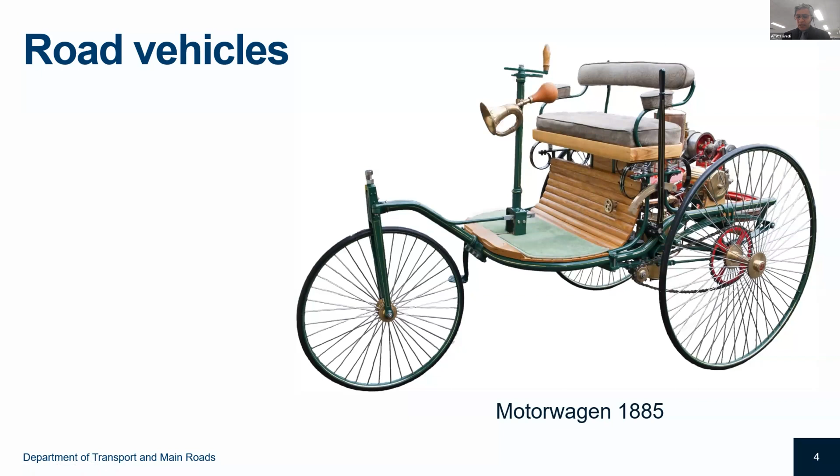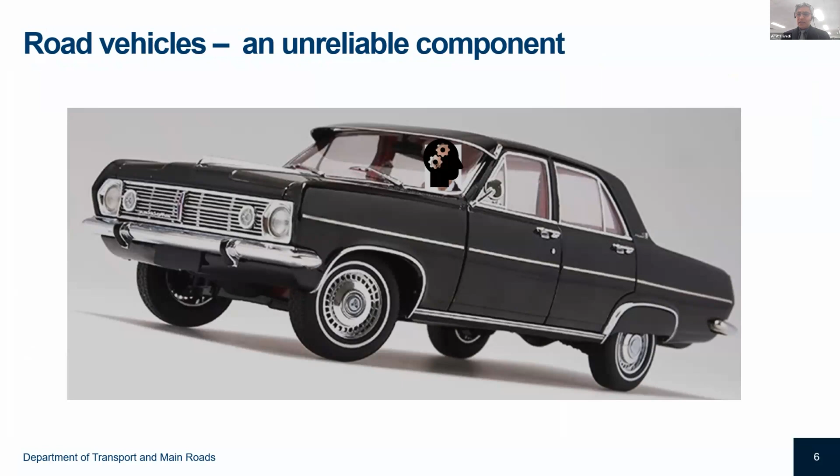So there you go. Let's go back to history. Automobiles came into the world in 1885. Carl Benz introduced this three-wheeled vehicle, the first patented production vehicle. Others did as well, but they never went to production. And ever since then, we have had pretty good evolution of the technology, and Carl Benz's company today is Mercedes-Benz. So there is a massive development over about 135 odd years. Yes, there has been quite a lot of development, but there has been one unreliable component present right from the beginning of the 1885 motor wagon, and that is the human driver. So all our projects are about trying to support the human driver or potentially replace it if we can.

Now, while automobiles have evolved significantly, computer technology has evolved many fold, massively. What you see on the left is an 1885 calculator, the Thomas arithmometer, a mechanical calculator, and on the right is NVIDIA's Orin chip, which packs in, I think, 17 billion transistors and 200 TOPS of performance. And I think they've got a new one now, which is about 4 times more powerful than this one.

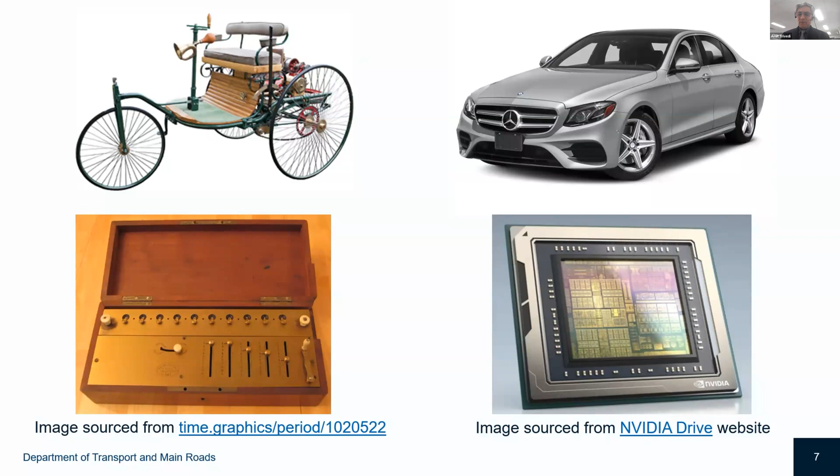And I'm going to focus on the physical road infrastructure side of the work package, and Professor Glaser will focus on the remaining work packages. So I'm going to straight away show a quick video. This video doesn't have any sound with it, but this is Zoe 1 when we put it together, and these are the QUT engineers putting Zoe 1 together.

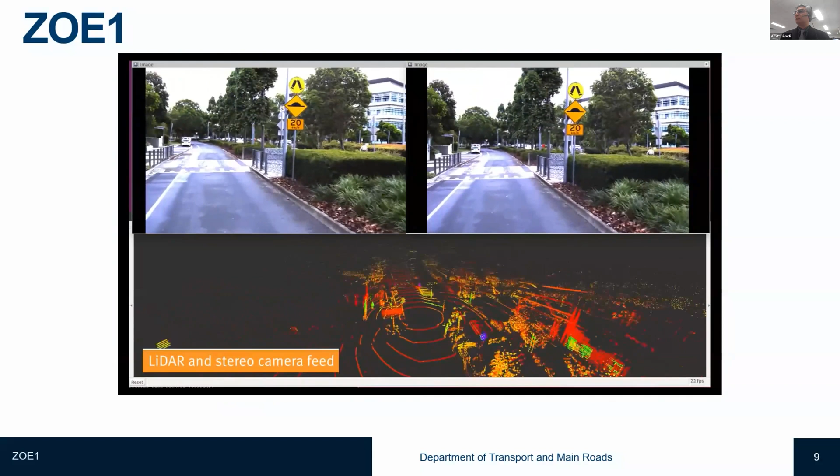Our final report is a public report. It is available on the iMOVE website. What we did with this vehicle, we went out on a 1,200 kilometer drive around Southeast Queensland, various roads, various weather conditions, day and night, and collected data, worked out the traffic lights, traffic signs, and road lines, as well as accurate positioning and what are the impacts or what is actually required.

What came out of that, our results, the report provided quite an interesting insight. This report was actually published in 2019, so it might not be that interesting today because we know things have evolved quite well, but at that time it was quite interesting to know, and that is that the technology is evolving.

There are 2 philosophies emerging. One philosophy is that if humans can drive with stereo vision and without any high definition maps in our brains, then automated vehicles should do the same. The other philosophy is if you want high reliability, you will need multiple sensors such as LiDARs, radars, and cameras, as well as some sort of high definition map or prior maps to achieve a high level of reliability.

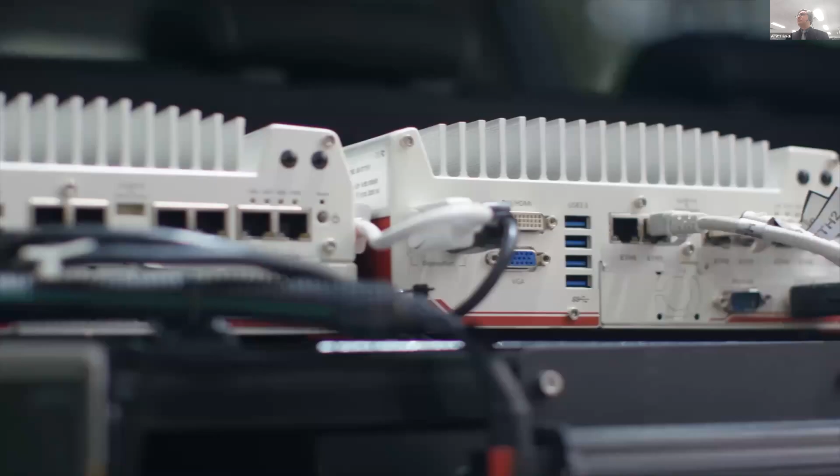As our population grows and roads get busier, the Queensland government is committed to supporting transport solutions of the future. That's why we've teamed up with partners like QUT to prepare for our evolution into driverless technology. A purpose-built research vehicle that integrates automated and connected technology into a Renault Zoe electric car.

There's a lot of talk these days about driverless vehicles, but the truth is there are no commercially available fully automated cars on the roads today. Some cars have limited automated features like adaptive cruise control. However, no fully automated vehicles have been deemed safe enough to handle Australian conditions. And that's why we're running trials just like this, to ensure every step has been taken for maximum safety in the future. There are several different levels to automation in vehicles.

Levels 0 to 1 are older cars that are both hands-on and eyes-on with little to no automation. Drivers need to complete all tasks manually or do a majority of the work. Level 2 is the current level of automation in cars available on the market today. Think Tesla and vehicles with driver assist technology. They are eyes-on and can be temporarily hands-off. They have partial automation, where the vehicle assists the driver with steering, acceleration, or parking. But the driver is still responsible for safety-critical functions and must be ready to take control.

At level 3, the biggest leap in automation happens. Here, cars are still eyes-on and temporarily hands-off, but have conditional automation, such as traffic jam assist. This means the vehicle monitors its environment to drive itself in certain conditions. The driver's attention is still required. However, the system will provide a few seconds of warning before handing control back to the driver.

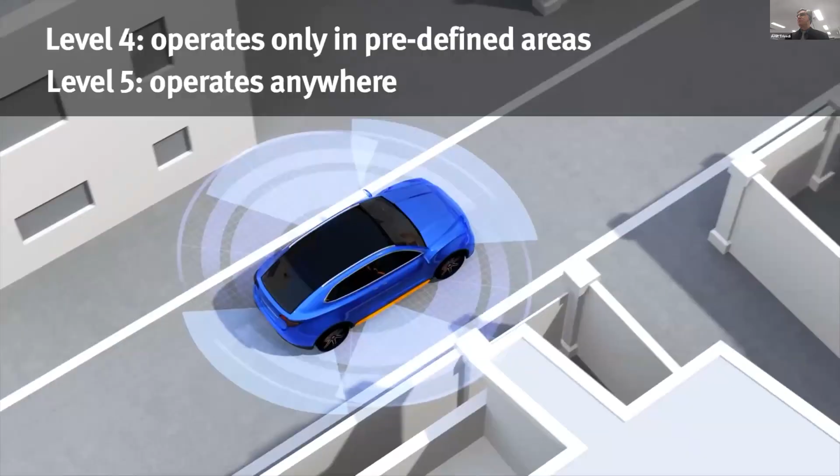Levels 4 to 5 are the highest levels of automation in vehicles. These vehicles are eyes off and hands off. So the driver doesn't need to take control of the car unless they want to. Or at level 5, the vehicle can operate in any environment, in any condition, without any human input at all. This level is still a fair way off.

Zoe 2 is a level 4 automated vehicle. This means it is capable of self-driving in defined areas, with the driver or passenger being able to take manual control when they want to. Zoe 2 combines automated technology with connected technology, so it drives itself, but can also interact with other connected vehicles and infrastructure on the road, so it can take corrective action based on the messages it receives about its environment.

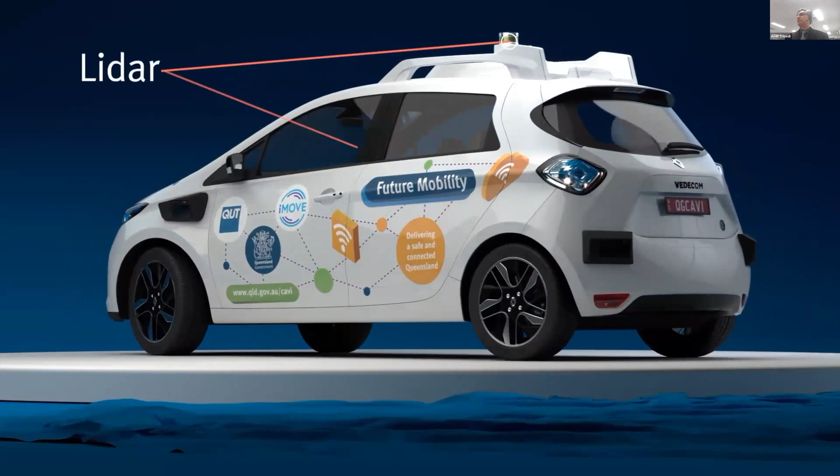Zoe 2 is packed with a variety of sensors, such as LiDARs, radars, cameras, and several computers. These systems work in real time to perform 3 core functions. Some of these systems help with localization, informing the car of its location within the overall environment. For pinpoint localization on the road, Zoe has 3 distinct and independent systems. First being GPS-based, which is satellite-based, and it provides Zoe with an accuracy of within 2 to 5 centimeters.

Second being SLAM, simultaneous localization and mapping. The car has a LiDAR on top and it maps the environment, and when it navigates through that environment, it triangulates and very accurately locates itself. And the third one is a stereo camera in front of the car. When the car is traveling through tunnels where you don't have satellites, nor do you have distinct available points around the tunnel, in that case, we can command the stereo camera to maintain itself within the road lane.

Closely linked are systems that help with perception. This helps give the car a better understanding of its immediate surroundings. Zoe, once it knows where it is in the environment, now it needs to know what is happening in that environment. To understand that, Zoe has a fairly sophisticated perception system. Again, it has 3 totally independent perception systems. First being based on the LiDAR, which is laser-based. Then second one is a vision-based camera. And the third one is a radar, radio-based sensors.

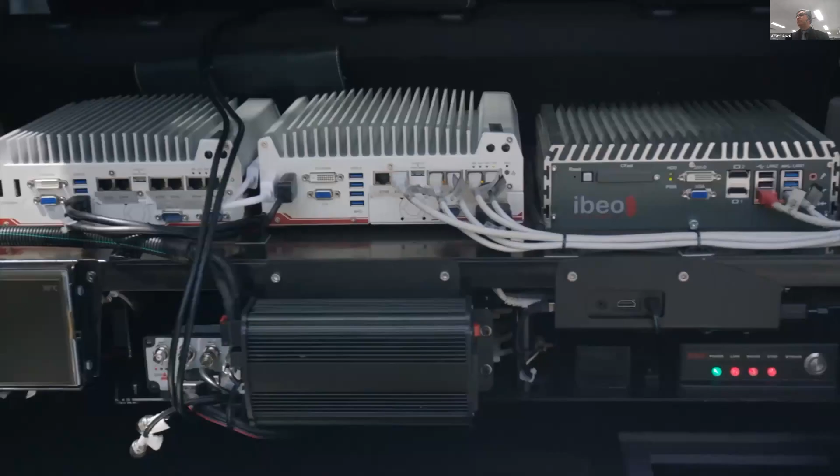Now it looks into its hard drive where a high-definition map of the environment is stored. The high-definition map has all the information about the road's speed as well as any other intersection that it is approaching. Based upon all that information, the software algorithm will start calculating what is the projected trajectory of the car and various objects around about it. Based on that calculation, the car now decides how much steering angle it needs to give, or acceleration, or the brake,

and proceeds further. While these technologies work very well, they are not perfect, and therefore you'll notice two rather large buttons in the center console. These are just some of the safety measures built into the vehicle, allowing the driver to interrupt its automation and take full control. The car right from the beginning was designed as a research platform. And as it's a research platform, the car has several built-in safety measures.

First one being the driver can decide any time and apply gentle pressure to the steering or the brake pedal or the accelerator pedal, and the car will hand back control immediately. The driver can also choose to press the red button. That would apply an emergency brake and stop the automation. There is also a yellow button. If that button is pressed, the car will apply a gentle emergency brake and will hand back control. Moreover, there is a remote control. Through this remote control, the car can be stopped remotely.

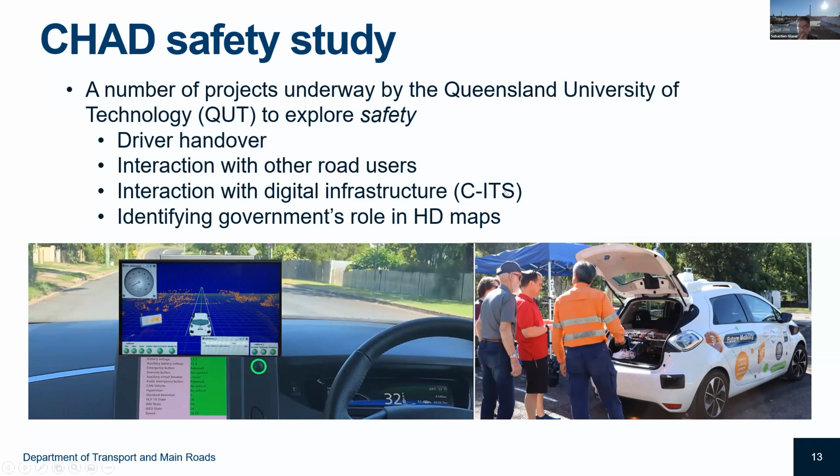I was mentioning it's a world first because it was a very long experiment that was not conducted on a driving simulator. It was conducted on a car, on a test track, and the driver had to react to several different situations during a more than 30 minutes drive. It was tested under several conditions, and for those who don't know what Brisbane looks like in March, we experienced several severe rains, some where we even had to stop, but we thankfully managed to do all the experiment.

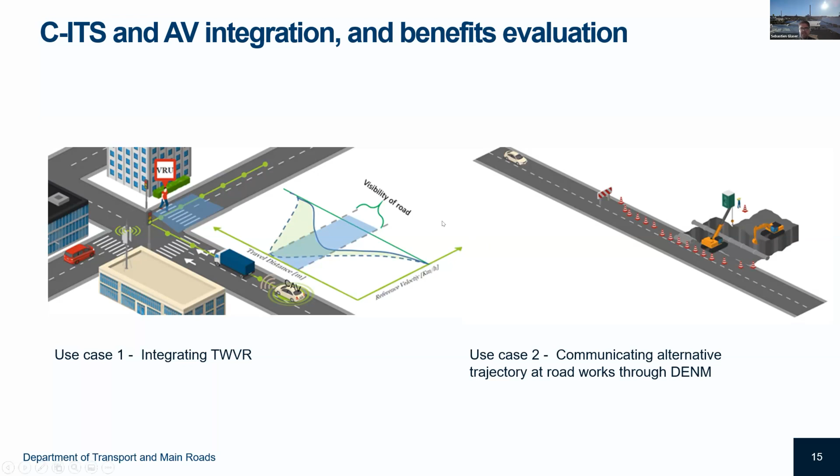The last case I wanted to develop about this cooperative and highly automated driving safety study is the interaction with other road users. It was a quite large sub-project to the CHAD project, which investigates the specificities of the Australian environment that are not taken into account when looking at overseas development of automated vehicles.

Just to cite a simple example, we have specific wildlife that need to be understood. As explained earlier in the video, it's not only required to detect an obstacle, but it's far more clever to understand what this obstacle is in order to predict its future path. If you know something has very specific movement in the environment, it's easier for path planning to define future trajectories which are safe and won't interact with the detected object.

From international review, we selected 13 specific scenarios in Australia. One of them is related to wildlife. We have staggered lines, and plenty of this type of scenario seen in Australia. In order to make sure our scenarios are very specific, and to have a better understanding of which scenarios are critical in terms of road safety, and critical in terms of impact on the deployment of automated vehicles...

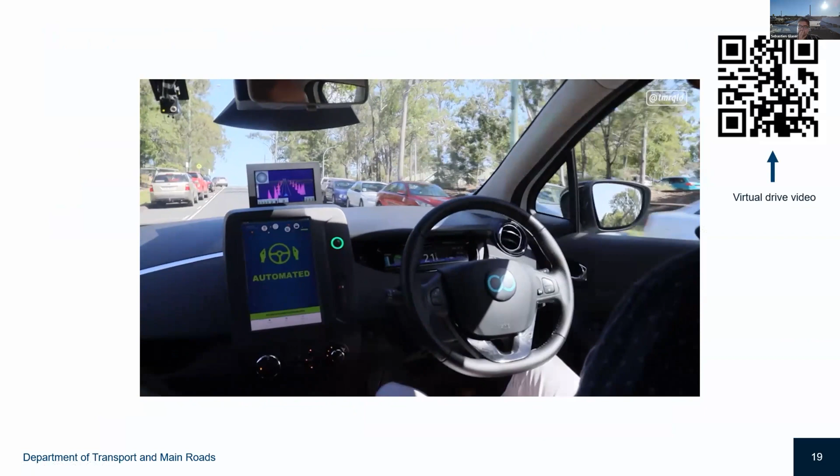In March 2020, the Queensland Department of Transport and Main Roads ran public demonstrations of a highly automated vehicle in Ipswich. These demonstrations were designed to test the public's attitudes and trust of emerging vehicle technologies. The demonstration showcased how automated vehicles navigated real-time traffic and other applications like summoning a robotaxi through a phone app. Overall, 73 public participants experienced automated vehicle technology firsthand.

So yes, Amit, do you want to read this one with me or go through this one with me?

Yes, so CHAD is quite a different pilot than many others. The main reason is that the platforms and database we have in the backend allow us full access to every bit of data that Zoe collects, as well as all the algorithms besides just one safety critical algorithm. Everything else we have access to and develop ourselves, including associated artificial intelligence. So that gives us a lot of control and good understanding by opening the black box of automated driving systems, ADS - what it's like and how they can be difficult sometimes, and how they can be very computer-like, not human-like at times. So that gives us a lot of insight.

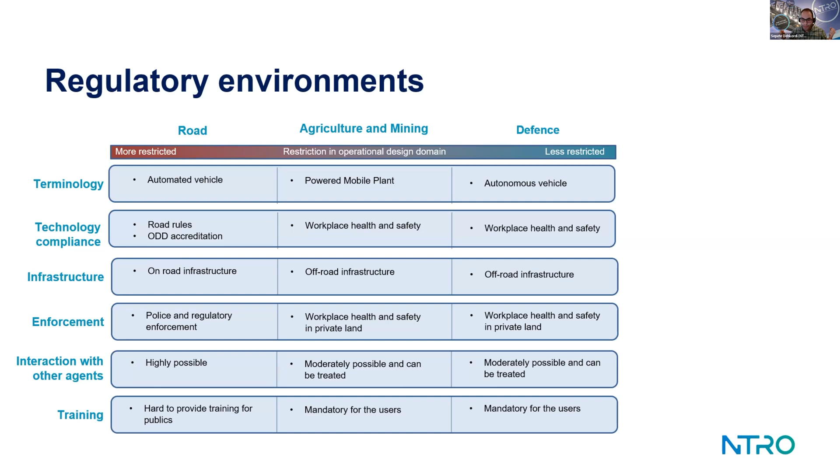So we have different terminologies, we have different objects, but at the end they are actually the same. The question is how we can transition from one domain to another when the terminologies are different but the application is the same. This is actually the subject of harmonized SMP. The harmonized SMP facilitates a smooth transition from one domain to another.

In this first section of the presentation, I want to talk about why we think harmonization is needed. Is it really important to have a harmonized SMP plan? We try to argue the benefit of harmonization. From our experience, the SMP content is mostly the same. Also, many stakeholders are involved in one way or another in developing the safety management plan. So this makes a strong case for the harmonization of the SMP.

The ADS trial has different requirements to operate in different domains, so they have differences with each other. The transition from one domain to another requires defining an inter-domain transition model, and this is usually the subject of argument or confusion in defining the safety management plan. Our practice shows that a cohesive safety standard promotes a proactive safety culture and improves overall safety performance.

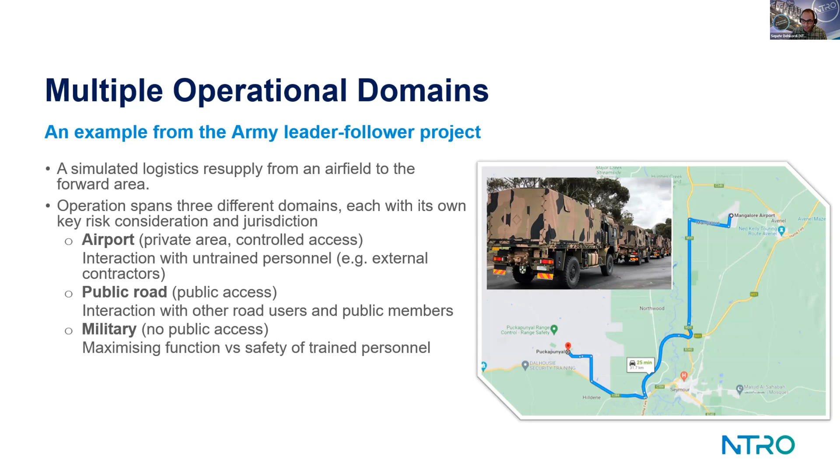Within the military bases, there are lots of things that it's possible to control, and there is a trade-off between maximizing function and also safety of the trained personnel in the army base. One consideration we found interesting was that there was a requirement for the public road to have escort vehicles, and these escort vehicles were not allowed in the forward area in the base station. How we do the transition smoothly between these domains was a subject of understanding the safety management plan completely in 2 different domains.

Also, a safety driver is mandatory on the public road, but it wasn't mandatory, and it was possible to remove the safety driver, in the base station. But again, it comes to the safety and risk register, in which location and where this can be done.

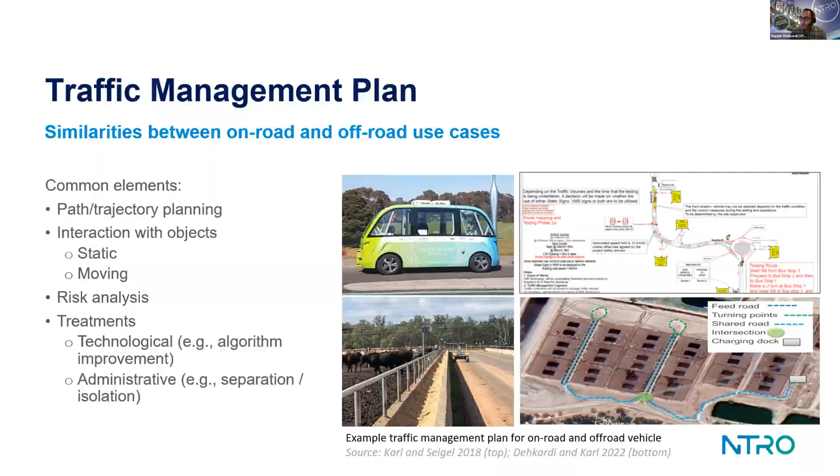To sum up, if you want to just quickly see what is our perspective for the harmonized safety management plan, we work in all areas and we notice some parts are similar. There are benefits of harmonization for safety management. Harmonization of SMP for industry means they can operate on different operational domains. It would be beneficial for regulations, and different jurisdictions would have different regulatory domains, so they can understand each other easily. And finally, a harmonized safety management plan will simplify the regulatory requirements for the project.

Ultimately, if I want to put in one sentence what we think about harmonized SMP, it would result in more fit for purpose operation for different domains. So it reduces the cost and energy that you need to put into an ADS trial.

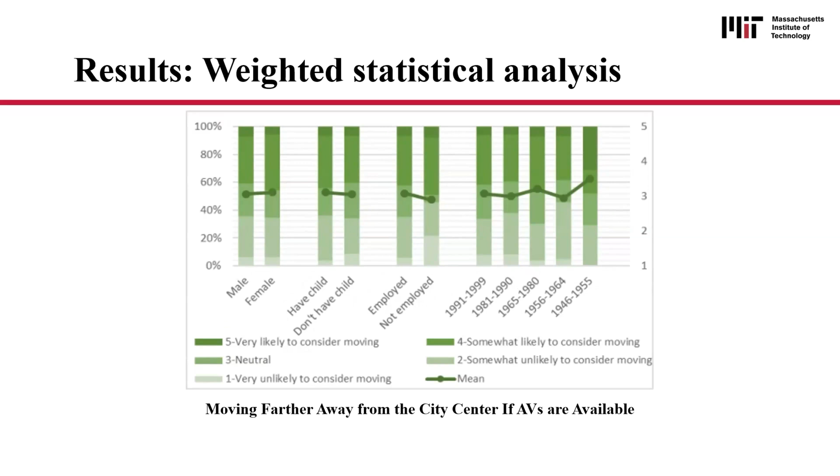This study conducts statistical analysis, including 4 ordered logistic regression models, t-test, and ANOVA. We observed some similar and different model results in this study compared with the previous studies. We have summarized the comparison results of the influencing factors on the above 4 dependent variables. Different groups had varying preferences on AVs.

Drivers with a higher educational level have more knowledge of AVs and show more likelihood of trying out AVs. However, they show less likelihood of changing to AVs and moving further away. They would consider more factors and be more cautious when associating AVs with daily lifestyle.

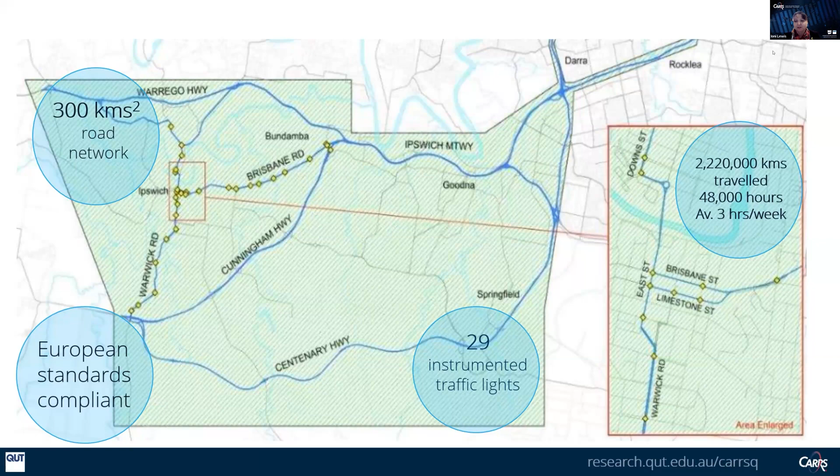In terms of the use cases, there were 4 cellular use cases that we were testing as part of it. That include roadworks warning, in-vehicle speed, back of queue and road hazard warning, as well as 2 traffic light signals, that being the turning warning with vulnerable road user and advanced red light warning.

In terms of the sample, you can see here that the overall sample, we started with 355 participants, 350 who completed our baseline questionnaire survey just prior to the CITS equipment being retrofitted into their vehicles. So I should add, these were public participants we recruited who were willing and able to have this technology, the connected vehicle technology, fitted into their vehicles for a period of 9 months of the trial.

I won't go into all the details on this slide, except to say, as you can see down the bottom of the slide, by the end of the trial, at the 8th month period, where we administered the 4th and final questionnaire, we had 326 participants, of whom 323 completed. So really good continuation of participants throughout the pilot.

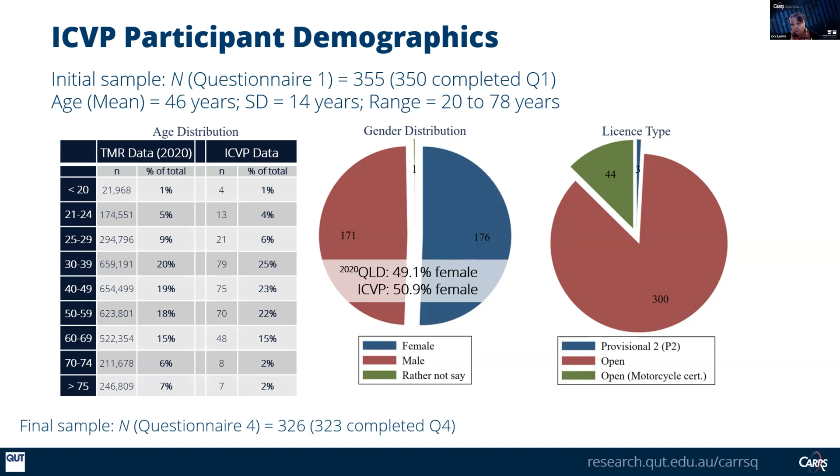Our sample also matched really quite well with TMR, Transport and Main Roads licensing data. So we were quite confident we had a good representation of the drivers who were involved, noting that we were recruiting provisional P2 drivers as well as open license holders.

Just as a very quick snapshot of the participant conditions and hours, you can see on the graph there that essentially, as was one of the participation criteria, participants were required to drive a minimum of 3 hours per week in the Ipswich area where the technology was being trialled. And generally, despite this occurring during COVID, we did have participants easily meeting that requirement.

We also had conditions of an intervention group and a control group. The intervention group was either assigned the treatment first, in which they had 6 months of their 9 months with the HMI switched on, and 3 months with the HMI switched off, and then the baseline first, the other way around, the HMI off for 3 months and then the HMI on for 6 months, and the control group that did not have the HMI throughout the pilot.

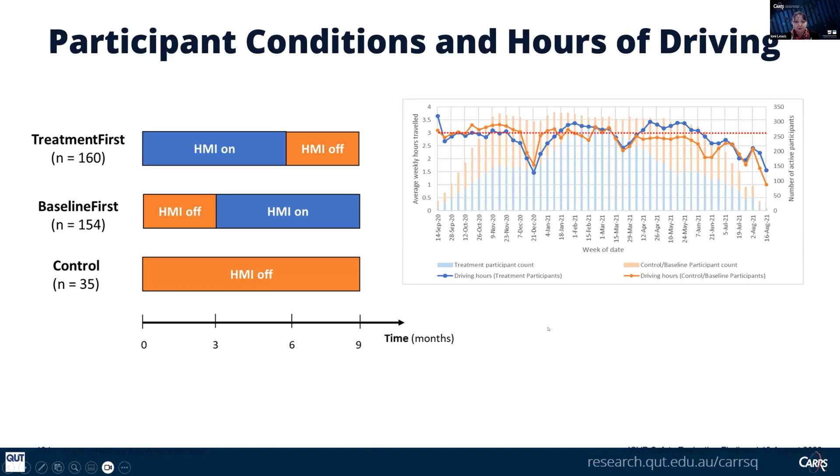At this point, I will pass to Mohammad to talk through the safety evaluations and the driving data that was collected and analysed by himself and many members of the team. Thanks, Mohammad. Thank you, Professor Ioni.

During the coming few minutes, I'll take you through how we answered the first question: does the CITS improve road safety? As you know, it was anticipated that the CITS warnings generated by the system would yield a positive influence on driver behavior, which may lead to a decrease in both frequency and severity of collisions. To assess this, we came up with two hypotheses.

The first hypothesis we call the speed hypothesis, and the second hypothesis is acceleration. And if you are not familiar, the acceleration is simply the summation of the absolute value of acceleration. So we consider acceleration and deceleration without any sign. The first hypothesis assumes the average speed normalized by the speed limit on the approach to or within the use case event is lower when the HMI is on. This is the first hypothesis.

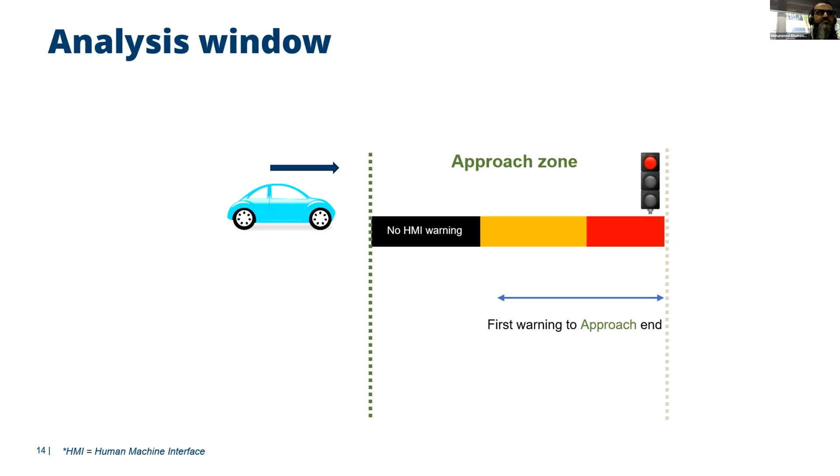We followed this approach to define the analysis window because the whole design of ICVP follows the FESTA handbook. In FESTA, all the analysis is something called event-based analysis, so we have to define a window which includes the event.

We collected a huge number of scenarios. However, we didn't include all of them in our analysis. We did many steps of filtering.

The first step of filtering: we remove all scenarios which don't include anyone, and then we remove all scenarios which have a participant marked as unknown. We also remove the first 2 weeks, the familiarization period at the very beginning, and we remove the 2 weeks when the participant switches from enabled HMI to disabled, or HMI off, to avoid any residual behavior.

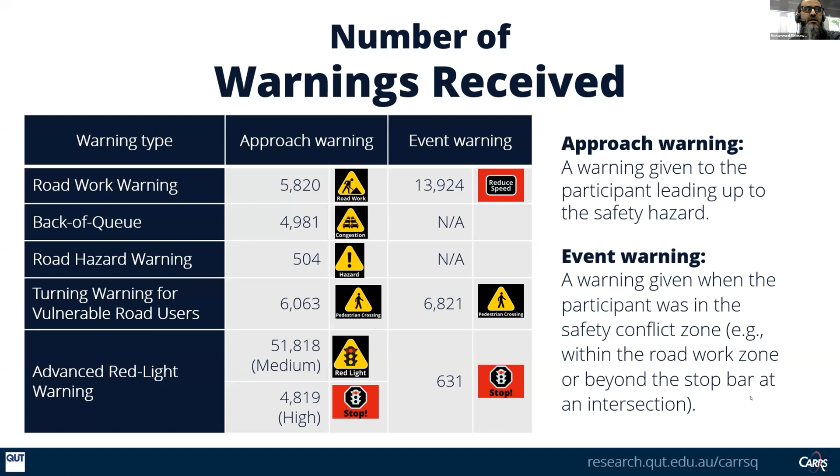HMI disabled. Next, our modeling methodology is simple. We use generalized linear mixed effect models, but because of the strong assumptions of this kind of model, most of our analysis doesn't satisfy those assumptions. So we had to use bootstrapping, a mixture of generalized linear mixed effect models and bootstrapping.

We defined our response, fixed effect regressors, and random effect regressors. The responses are speed and acceleration. For fixed effect regressors, of course the main one is HMI on or off. We have participant-related regressors, and we have context and environment related

regressors. In order to account for the correlation, because the data comes from the same participant or the same intersection or roadwork, we had to add random effect regressors. Depending on the use case, we have 1 or 2 random effects in our model. So, next slide please.

So in the next few slides, I'll show you the result of 2 use cases. And the first use case is roadwork warning.

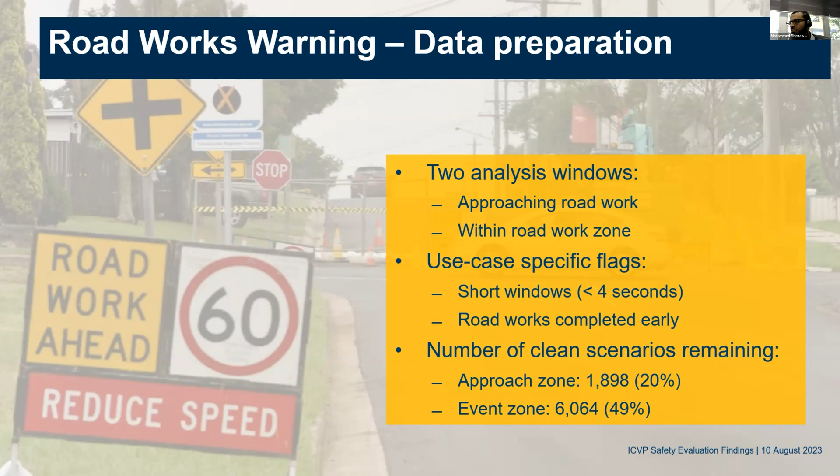Also, we use manual flags, such that we remove any scenario collected after a roadwork is completed. After applying all the cleaning and this strict acceptance of scenarios, we end up analyzing 20% of the scenarios in the approach zone and 49% of the scenarios in the event zone.

However, if we try to understand, is this really a bad finding? It turned out no, it's not a bad finding. This happened because the participants who had HMI enabled received the message about the roadwork and reacted earlier than the people who had HMI off, and this is why we have this increase in deceleration. So we anticipate that this early reaction could be viewed as a positive safety outcome despite this higher deceleration.

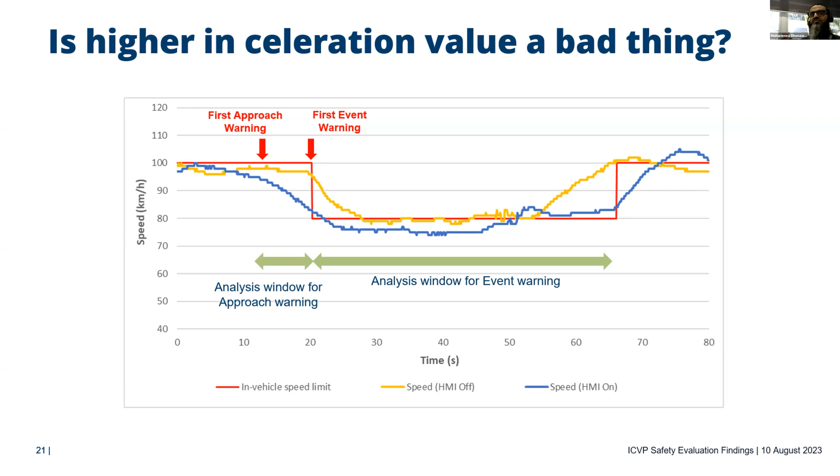The second use case is advanced red-light warning, and we have only one analysis window, in the approach of the intersection. In this analysis, we only keep scenarios when the connected vehicle is first in the queue, because we don't want to include cases where the vehicle is not first in the queue, since the freedom of the driver is limited.

So we remove any scenario where the connected vehicle is not first in the queue. To make sure, since we don't have videos, we put this kind of rule: if the vehicle's stopping distance from the stop line is greater than 5 meters, then we remove this scenario, since it is not the first vehicle in the queue.

We analyzed 20% of the scenarios in the approach zone, and we find a reduction in speed and a smoother driving style. As you can see, we also have a reduction in acceleration.

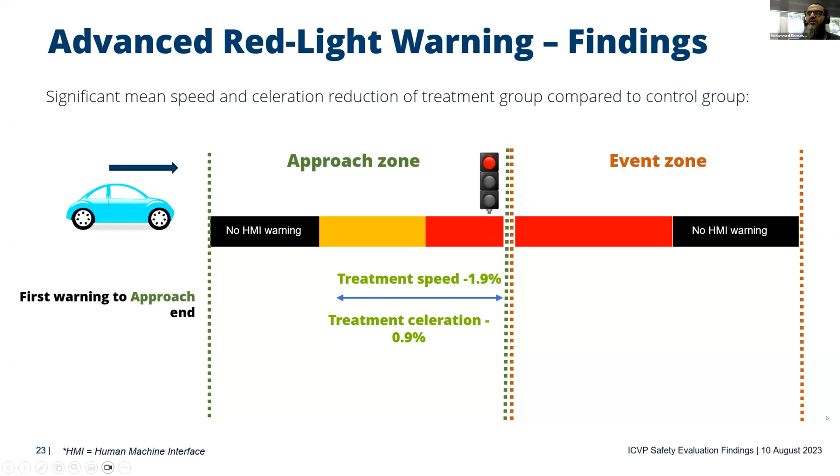In general, we find there is significantly lower speed and acceleration for most warnings. However, for example, for the RHW, the road hazard warning, the number of scenarios was very small, and the statistical modeling didn't yield a conclusive finding. We also have some difficulties with back of queue because of its dynamic spatial-temporal nature. However, we find some evidence that the HMI-on drivers are behaving in a smoother way compared to drivers without HMI.

So the final step of the analysis is, well, now we need to calculate the crash reduction for each use case. Our crash reduction methodology is simply based on the well-known Nilsson power model.

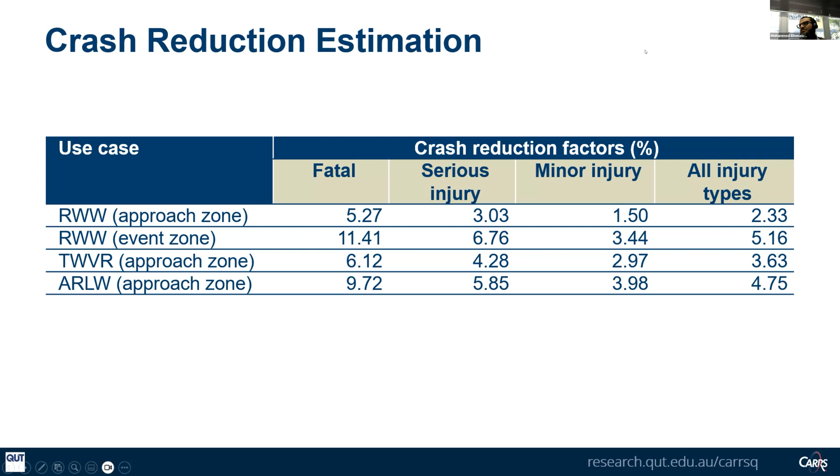So I'm very conscious of time. Thank you so much, Mohammad.

As you can see, so much data, so many things to work through with the driving data that the ICVP produced. I will talk very quickly about the other component of this study today, related to the self-report aspects, user perception. A system can be as good as it possibly can be, but if for whatever reason people don't want to use it or don't like using it, we need to know that, and we need to know what needs to be done differently.

So this was all about the second research question: do users find the system acceptable? The user perception studies comprised a variety of self-report methods, which included questionnaires administered 4 times throughout the 9 months a participant was in the ICVP, starting at a baseline before the treatment technology was retrofitted in their vehicle, again at 3 months, 5 months, and 8 months.

We also had individual phone interviews that we conducted at 3 different phases throughout that 9-month period. And we had a final collection of data through focus groups once the equipment had been removed. I'll talk very quickly about each of these methods and findings from them.

In terms of the survey, very consistent with literature and evidence in terms of theoretical frameworks that inform the types of measures we use to enhance the comparability of our findings to other studies around the country and indeed the world. As an example, there is one of the attitudinal measures that we had in the questionnaire that was repeated 4 times.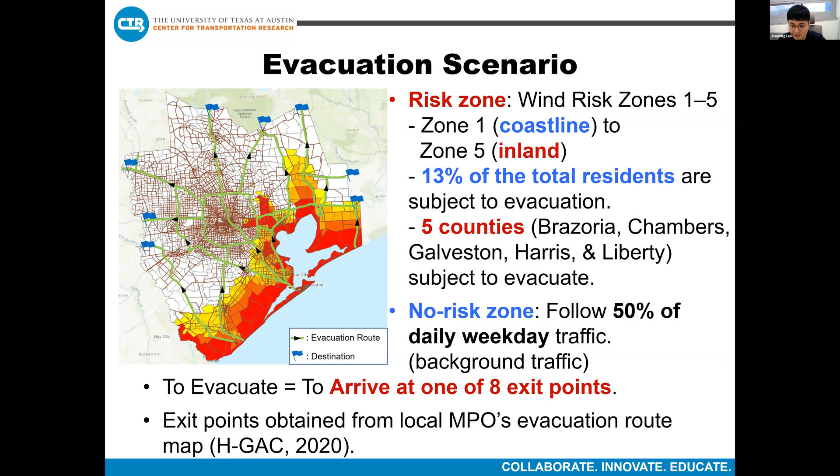And the other residents who live outside of this risk zone are colored white, and they will maintain 50% of their daily weekday traffic and serve as the background traffic in the simulation. And we are trying to evacuate them to the 8 exit points, which are the flags in the left figure. And these exit points are obtained from the local metropolitan planning organization's evacuation route map. To operate the special bus, its station location should be allocated, and this paper uses an accessibility measure to find out where the bus station is located.

So the link with the highest accessibility will be chosen as the location, and 1 station per county is assumed. But for Galveston, this island, since there's a bridge, the I-45 highway bridge, that will be a major bottleneck to evacuate the residents from this island, an additional station is assumed for that island. And this equation here shows how the accessibility of a link is measured, which is a weighted sum of links population and the travel time.

So let's sum up the 6 bus station locations. These circle locations are the bus stations that gave the highest accessibilities per county. And to facilitate the bus operations, the 8 destinations are aggregated if they are located close together. So if the exit points are aggregated, the bus travels to the closest destination first, drops passengers there who want to go to that destination, and then moves to the next closest destination if there's someone still on board. To sum up, there's a total of 6 bus stations, 5 aggregate bus destinations, which makes up a total of 30 bus lines in the network.

And the departure time distribution assumes a staggered random departure time distribution. So zone 1, those are the most vulnerable ones. They will evacuate at a random time within the first fifth of the 6-hour duration. Zone 2 will evacuate at a random time within the second fifth of the 6-hour period. And zone 5 will evacuate at a random time during the 6-hour period. And the assumption of this 6 hours was derived from a previous evacuation order where the mayor of Galveston ordered their residents to leave within the 6-hour period.

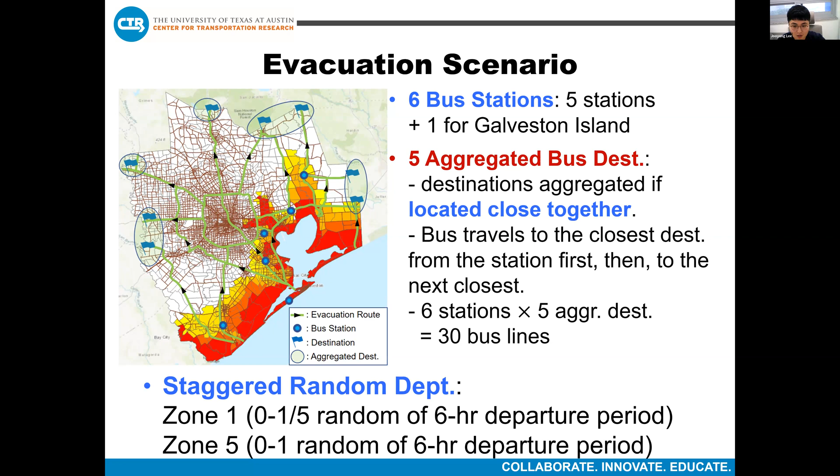So let's sum up the no vehicles available population. We are assuming that a person weighs about 150 pounds and carries about 50 pounds of luggage, so that 1 seat per person plus a third of a seat for luggage is required, so for a 3-person household, we'll need 4 seats. Oh, sorry. To start, we have to estimate the households that have no vehicles first. And next, we have to estimate those with insufficient vehicle ownership. We'll assume that all household vehicles are 5-seat passenger vehicles. And from the random sampling, if a household is assumed to have an insufficient number of seats, then the leftover household members will be subject to the no vehicles available population that needs help from the SAV system that this paper assumes. And the destination choice is based on the logit model as shown here, which is based on the travel time.

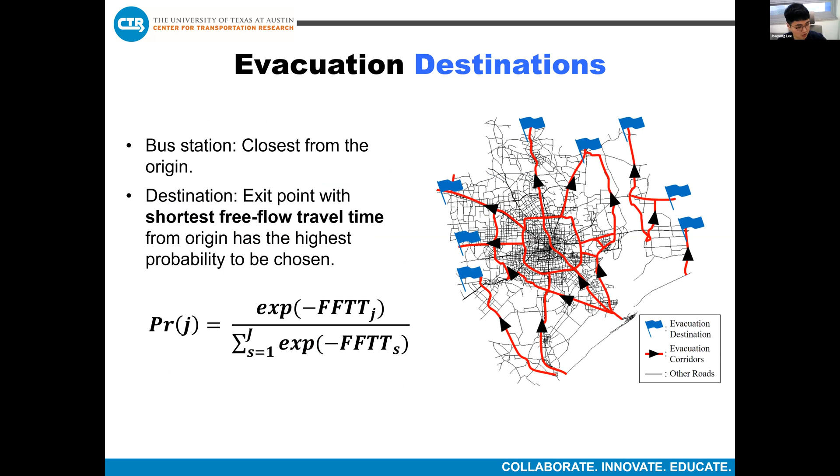And what's important is the bus schedule. We assume that there are 2 types of departure headway schedules for the bus, where the first one is a fixed schedule where the bus departs every 30 minutes, regardless of whether it is full or not. But the second one is demand responsive so that it departs whenever the bus is full. So the bus will leave whenever one of the 2 conditions is satisfied first. And this table shows the specifications of the vehicles. We have 5, 7, and 12-seater SAVs in the simulation, with the bus where there's 37 passenger seats plus 1 seat for the driver.

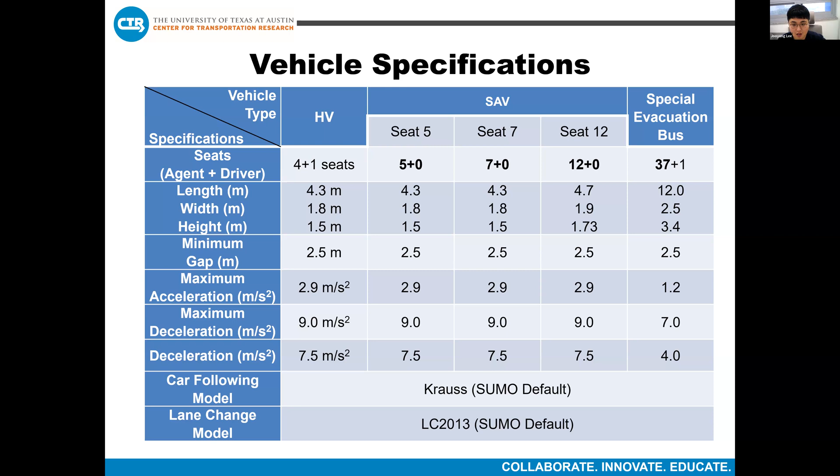And the status of SAV can be either idling or drive. And when it is idling, it will be located at the curbside and does not interrupt the traffic flow. The drive means that it's driving regardless of empty or not.

And so it will be matched by comparing the direct arrival time and the reroute arrival time with respect to the pickup agents, and also considering the onboard agents. So this is how the matching is performed. The SAV will perform if the difference between reroute arrival time and direct arrival time is within a certain level for all related agents. And when considering the DRS, the number of seats left at SAV should be at least larger than the household size of the agent P.

And here we've assumed that there's 15 minutes maximum time for the RT value, which will be relaxed in the further discussions. And for computational limits, we'll always pick up the agent P first, so that the new pickup agent's pickup call will be located first in the calling sequence and orders.

And if the agent is not matched, then it will be moved to a set named unassigned agents, and the agents are rank ordered by their initial call time and will be searching for their match continuously every 10 minutes.

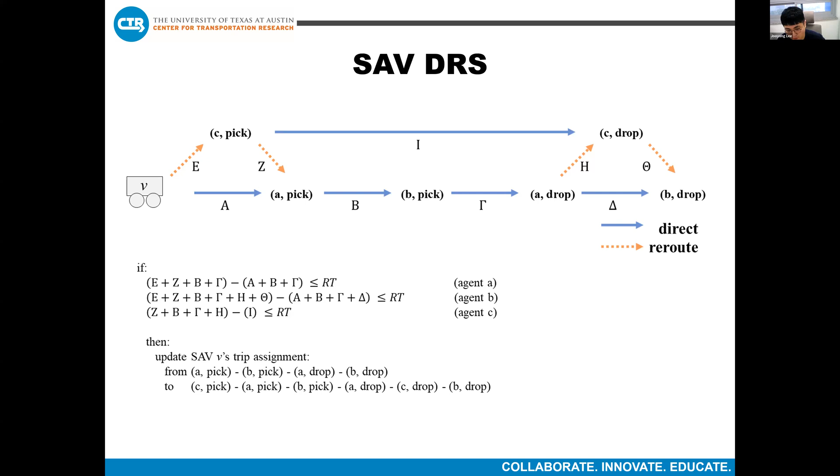And another scenario is, as I mentioned, the RT was fixed to 15 minutes in the previous section, but we can also think if this can be variable, which is variable to the bus headway and bus schedule. So the idea is that if there's sufficient time before the bus leaves, then we can rather reroute the SAV to pick up another agent.

But if the bus will depart soon, then we should not reroute, but we have to go directly to the bus station. So here, this rerouting will be dynamic, which is determined by the bus schedule, but we'll have a safety buffer of 25% to not miss the bus. So this is how the rerouting based on bus coordination works.

We do not know if the bus will be operated in a fixed schedule or demand responsive schedule. So both of them will be estimated first, and we compare the expected station arrival time of the SAV to the expected bus departure time of the two different schedules based on their last headway, and compare the two different values, and the smaller one, in this example, is value 1, which is based on the fixed schedule.

So we'll use value 1, but for the buffer safety issue, we'll have a 25% buffer, so that we use 75% of value 1 as the maximum rerouting time for the RT-IJK variable for that agent K.

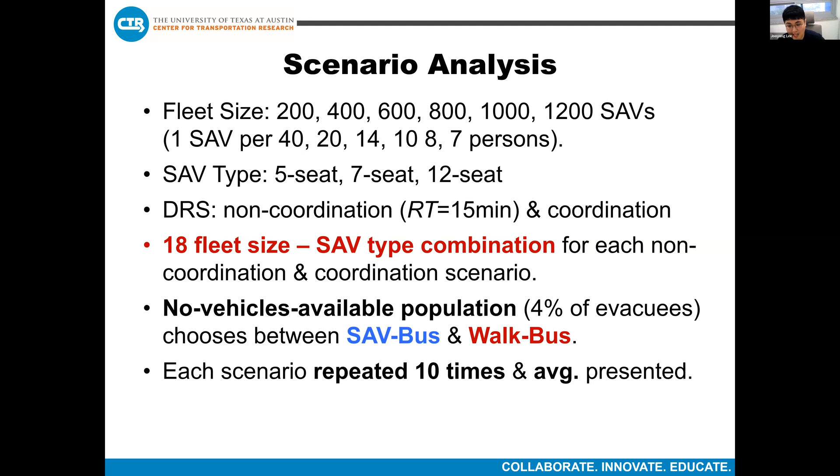And considering the time spent on an SAV, the contributing factor to reduce total time spent on an SAV per person is the waiting time reduction. With the larger fleet size, the waiting time reduces, but once more than 600 SAVs are in the network, this reduction is negligible. However, the travel time increases with larger fleet size, but the waiting time reduction can offset the increase of travel time, so that total time spent on an SAV decreases with respect to the fleet size.

And for the number of seats, it affects the total VMT, where an increase of seats results in a decrease of total VMT by SAVs. Since the number of agents is fixed in all scenarios, reduced total VMT means that fewer miles will be needed to serve agents, implying that ride sharing is promoted with more seats. Indeed, the increase of shared VMT percent and eVMT, the empty VMT percent, with respect to the increase of seats, supports this hypothesis, and more agents are likely to be on board with larger vehicle size.

And for the fleet size scenario, a similar tendency can be observed. Specifically, the increase of shared VMT with larger fleet size means that DRS is promoted with larger fleets. Thus, a vehicle spent more time on DRS with the increase of fleet size, so that travel time increased with larger fleets, as shown in the previous slide.

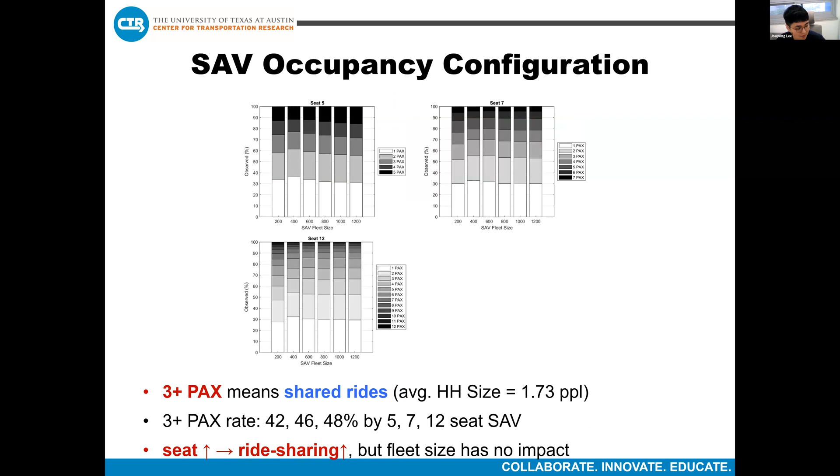And lastly, the operation time is presented, which is the non-idle time over the total operation time. So if we have more than 600 SAVs, the operation time becomes excessively low, below 50%. If we have less than 600 SAVs, we've seen that the travel time is too long, so we conclude that having 600 SAVs, which is 1 SAV per 14 people, with all being 5-seated SAVs, is a cost-effective base case scenario. Next, the bus coordination strategy is analyzed. I'll go really fast in this session.

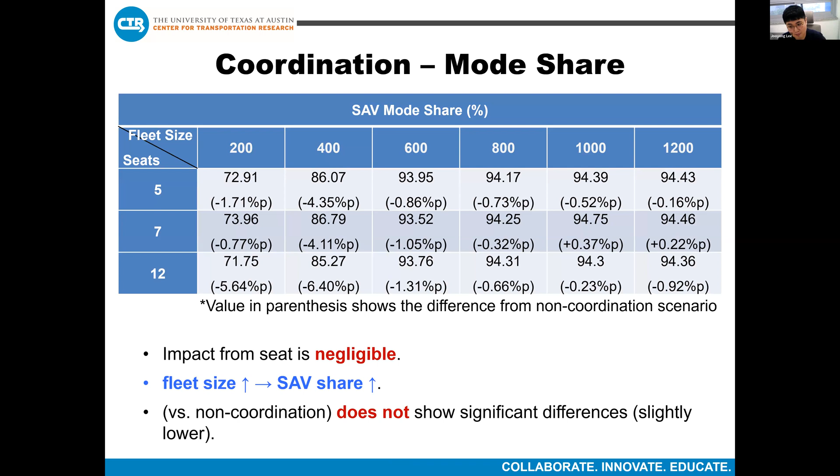This table shows the SAV mode share result from the coordination scenario, and when compared to the non-coordinated scenario, which is the value in the parentheses, the mode share result does not show much difference, although mode share slightly decreased when coordinated, but the total VMT increased, which implies that DRS is more restricted with coordination. And the shared VMT percent decreased, so the maximum reroute time is smaller than the 15 minutes on average when it is coordinated.

And comparing the waiting and travel time, first the waiting time greatly increases with smaller fleet size, but it's negligible with more than 1,000 SAVs. But the travel time falls when coordinated because of the direct travel. So when it's coordinated, the SAV doesn't reroute much, but goes straight to the bus station. So we can expect a trade-off of increased waiting time to get my chance to take that SAV. But if I get the chance to get on that SAV, then the travel time gets lower when it is coordinated.

So we have to measure the performance by the bus departure and arrival time, and both of them did not change much with the coordination. So what we can conclude from the coordination scenario is that the performance, the departure and arrival of the bus, does not change much, but we have seen a trade-off between increased waiting time and decreased travel time. So this can be an option if the evacuee accepts this kind of trade-off, since the overall average performance would not change much.

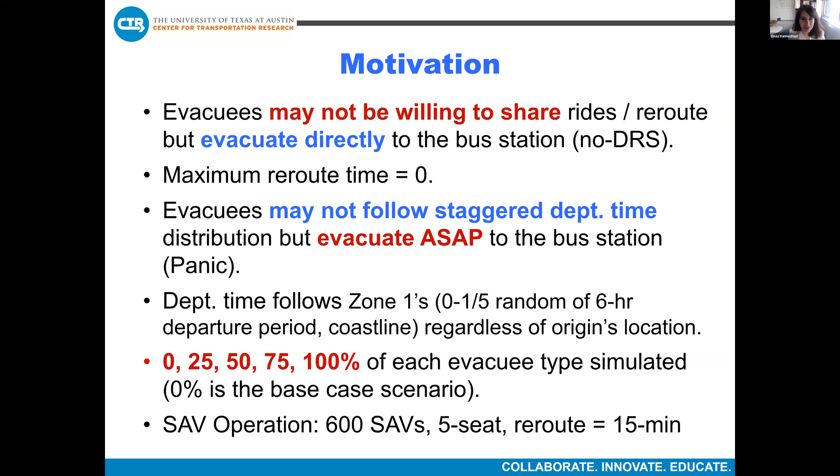And Jooyong, I'm so sorry, can you wrap it up in 1 minute? Because we're kind of running out of time. Yes, sorry. Sorry. So I will make a conclusion here.

For the no DRS case, the waiting time increased, but the travel time decreased as well.

But the problem here was that the departure and arrival time of the evacuation bus increased, so this case is not recommended, and evacuees' ride-sharing behavior should be recommended. But for the non-compliance case, our simulation suggests that at least the bus departure and arrival reduced, so the system can manage the evacuees' non-compliance and make up sufficient evacuation performance. So this is how we've planned to use the SAV system in evacuation.

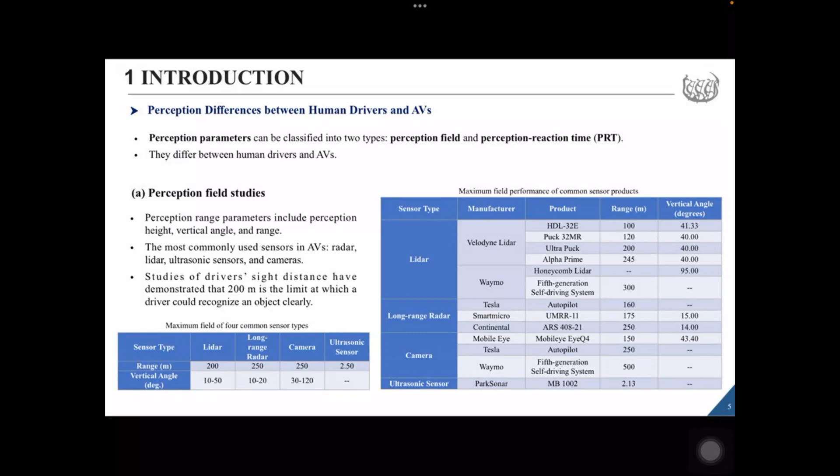Regarding perception reaction time studies, the Green Book published by AASHTO in the US recommends a perception reaction time of 2.5 seconds for design purposes, and previous studies showed that it appears adequate to cover the full range of drivers. For AVs, 0.5 seconds was selected in previous studies, with modern computation and actuation considered in the selection of the perception reaction time.

So about the research question in this study, since the perception differences may indicate the need for different design controls, it's essential to ascertain whether the existing design controls for highway alignments are applicable to AVs. This study aims to derive geometric design controls for highway alignments specifically to meet the circumstances of AVs and consider the perception difference.

The design controls to be derived and verified include the required stopping sight distance, length of sag and crest vertical curves, and length of horizontal curve and preview sight distance for combined alignments. The derivation methodology was based on the Green Book and the NCHRP report 600.

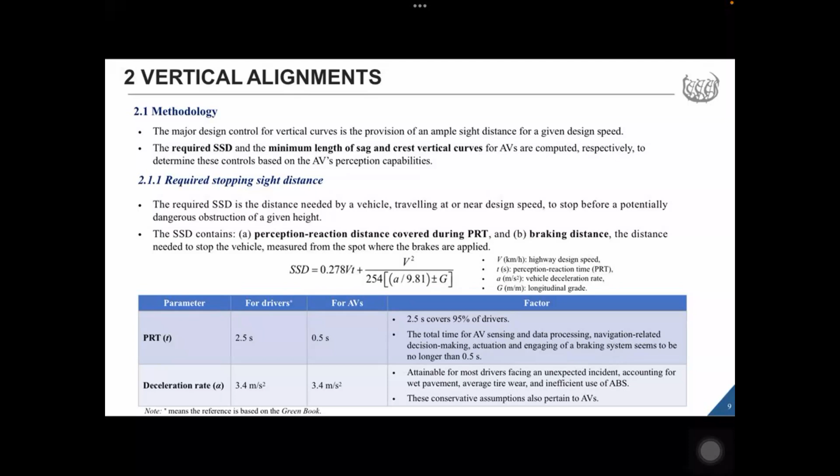The deceleration threshold for determining the braking distance for human drivers is recommended to be 3.4 meters per second squared. This threshold is regarded as attainable for most drivers facing an unexpected incident, and it accounts for wet pavement, average tire wear, and inefficient use of ABS. Because these conservative assumptions also pertain for the most part to AVs, the same deceleration threshold is applied to AVs. The next is the sag curve.

The minimum length of the sag vertical curve should meet four criteria: required stopping sight distance, passenger comfort, drainage control, and general appearance. Our comparison is limited to the first two criteria due to their greater importance.

For the computation based on the required stopping sight distance, the figure illustrates the parameters used in determining the length of the sag vertical curve that is needed to provide a specified value for stopping sight distance. The headlight height is used for human-driven vehicles because nighttime driving requires the most conservative stopping sight distance.

When a vehicle traverses a sag curve at night, the distance available to be seen ahead will depend on the headlight height and the direction of the beam. So a headlight height of 0.6 meters and a 1 degree upward spread of the beam are assumed in the Green Book. For AVs, the sensors will take over the perception responsibility.

The sensor height is determined by the vehicle type and the position of the equipped sensors. In this study, we assume the position of the sensor corresponds to the radar in its commonly located position in the bumper, and a sensor height of 0.45 meters is used according to the common sensor height and the typical bumper height of passenger cars.

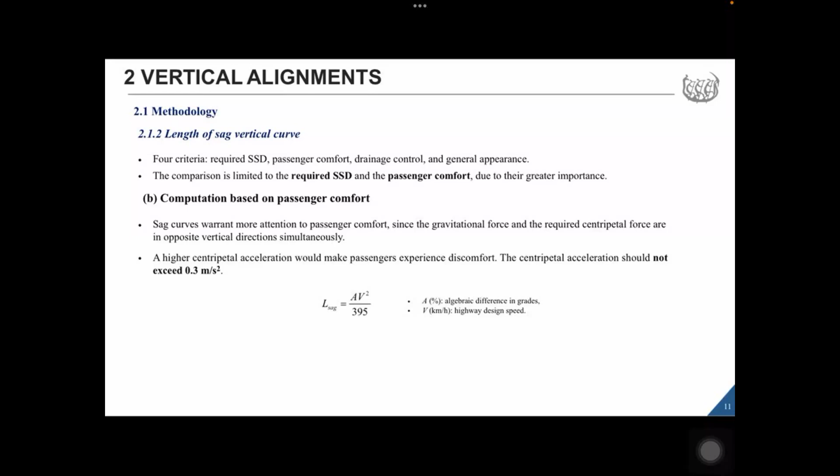Computation for the minimum length of the crest curve is based on the required stopping sight distance, and the sensor height is the same 0.45 meters used for sag curves. For human drivers, a 1.08 meter high eye height was selected in accordance with the Green Book. An object height of 0.6 meters for the tail lights of a lead vehicle is assumed for drivers in the Green Book. It is the same height used for AVs.

This part shows the computation results for vertical alignments. In accordance with the Green Book, the highway design speed in this study ranges from 20 to 130 kilometers per hour, and the longitudinal grade ranges from 0 to 9%. The two figures illustrate the comparative stopping sight distance profiles for AVs with a solid line and human drivers with a dashed line.

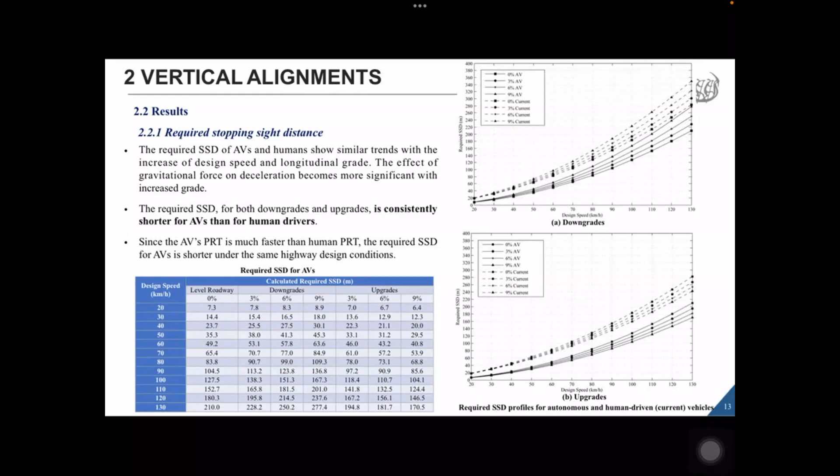The required stopping sight distance of AVs and humans show similar trends with an increase of design speed and longitudinal grade. The effect of gravitational force on deceleration becomes more significant with the increased grade. For both downgrades and upgrades, since the AV's perception reaction time is much faster than humans' perception reaction time, the required stopping sight distance is consistently shorter for AVs than for human drivers under the same highway design conditions.

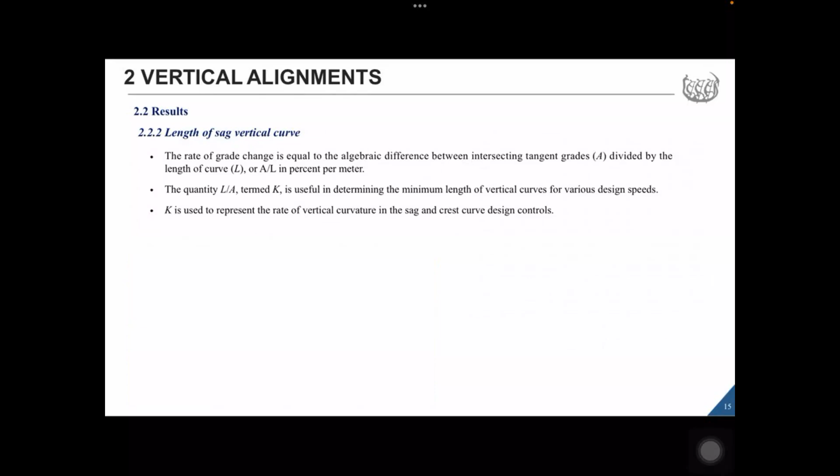As for the sag vertical curve, since the rate of grade change is equal to the algebraic difference between the intersecting tangent grades divided by the length of curve, the quantity L divided by A, termed K, is useful in determining the minimum length of vertical curves. And K is used to represent the rate of vertical curvature in the sag and crest curve design controls in this study.

It should be noted that the dominant criterion for sag curves differs between AVs and drivers. Passenger comfort is the absolute influencing factor for the AV, and for human drivers, the required stopping sight distance criteria takes precedence.

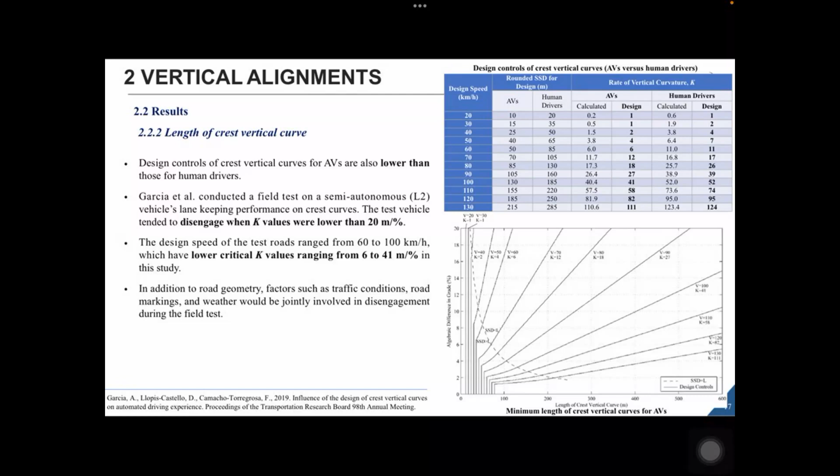The next section computes the design controls for complex combined highway alignments. The horizontal and vertical alignments should not be designed independently, but should be appropriately coordinated. In the Green Book, it recommends that a sharp horizontal curvature should not be introduced at or near the top of a pronounced crest curve, because the horizontal change in alignment may not be perceived in advance. And since the view ahead is foreshortened, a sharp horizontal curvature should not be introduced near the bottom of a pronounced sag curve. Due to constraints such as terrain or cost, these guidelines are not always met.

So we consider two design situations. Firstly, when the design meets the coordination guidelines, the horizontal curve should be longer than the vertical curve.

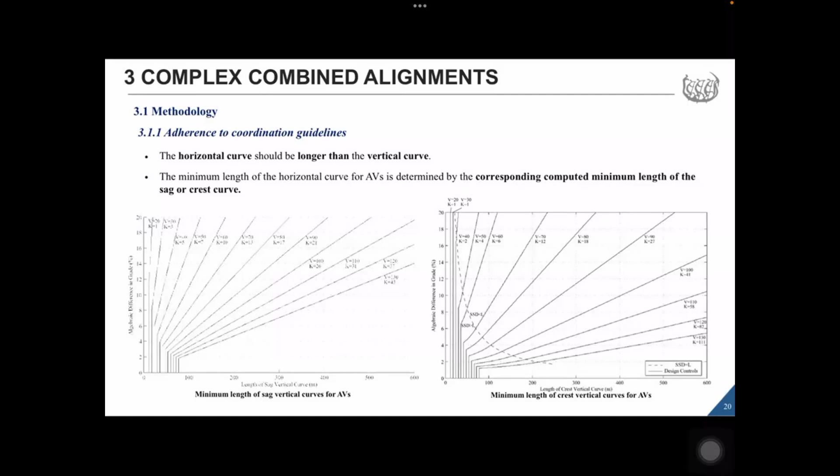The minimum length of the horizontal curve for AVs is determined by the corresponding minimum length of the sag or crest curve. When the design does not meet the coordination guidelines, the preview sight distance is used as a measure of driver sight distance to ensure safety.

The preview sight distance sufficient for a driver or AV sensor to perceive and respond to a horizontal curve ahead is applied, and it has two components: the total net distance traveled on the tangent approaching the curve, and the distance that must be seen, detected, or perceived for the horizontal curve configuration.

For the S1 component, it consists of two further components, the perception-reaction distance and the deceleration distance. These two components should lie entirely on the tangent and should end before the circular curve begins. We assumed that the curve operating speed is slightly lower than the design speed, supposing no emergency braking, so the curve operating speed is considered to be 95% of the design speed.

The other parameter is S2, the perception of the horizontal curve configuration. It depends on the curve's radius and its deflection angle. In Hassan's study, the established nonlinear regression model of delta performs well on goodness of fit, so it is used in the computation.

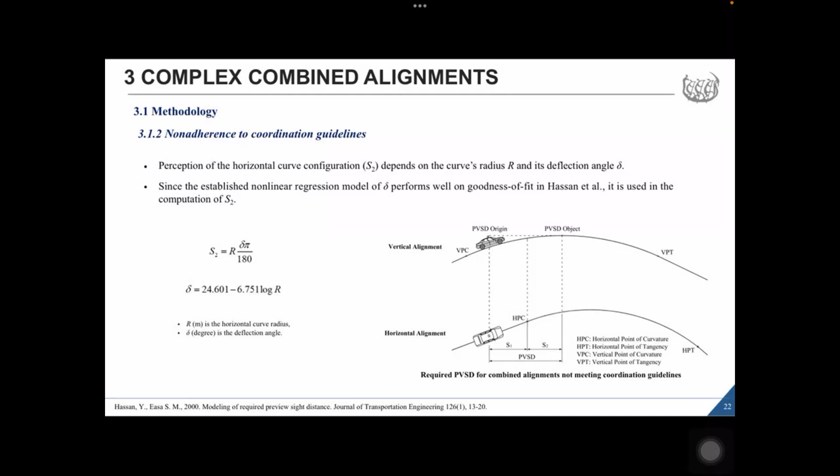The results show that the distance traveled on the tangent increases with design speed, and the distance that must be perceived generally increases as the horizontal curve becomes gentler, as does the distance required to produce a deflection. For the preview sight distance, it increases with both design speed and horizontal curve radius.

Since the perception-reaction time is the only perception parameter, this control is shorter for AVs than for human drivers as well. To sum up, the computed highway design controls for AVs are more tolerant than for human drivers, and results demonstrate that perception characteristics play a crucial role regarding the required stopping sight distance.

As it increases at higher design speeds and steep downgrades, because the maximum range of the AV is limited, the longer stopping sight distance suggested for these conditions may not be available for AVs. So to avoid either reducing speed limits or limiting vehicles' individual speeds, AVs with insufficient sensor ranges should not be certified for such conditions, and their operational design domains should be limited to lower speed roads.

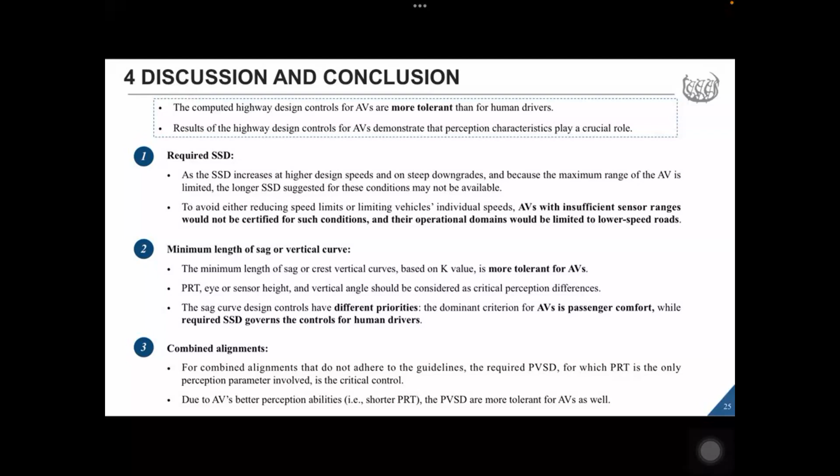At last, this study has two major contributions. On one hand, we provide initial results and conclusions for highway geometric design controls that are safe and suitable for AVs. On the other hand, because AV design controls are demonstrated to be more tolerant than current controls, the benefits of the proposed design controls could allow higher speed limits for fully autonomous vehicles, and highway construction costs could decrease.

But for the present, these more tolerant design controls should not be directly applied in the current mixed traffic of human-driven and autonomous vehicles.

For future study, we should include field-based and simulated experimental observations to consider sensor failures. Also, the values selected in this study might not be completely in accordance with future characteristics, so we should give further attention to the interconnection among human beings, vehicles, roads, and environments.

At last, I would like to present the recent work at Tongji, because the study presented today was conducted and published before, and some of the latest work has not been published yet.

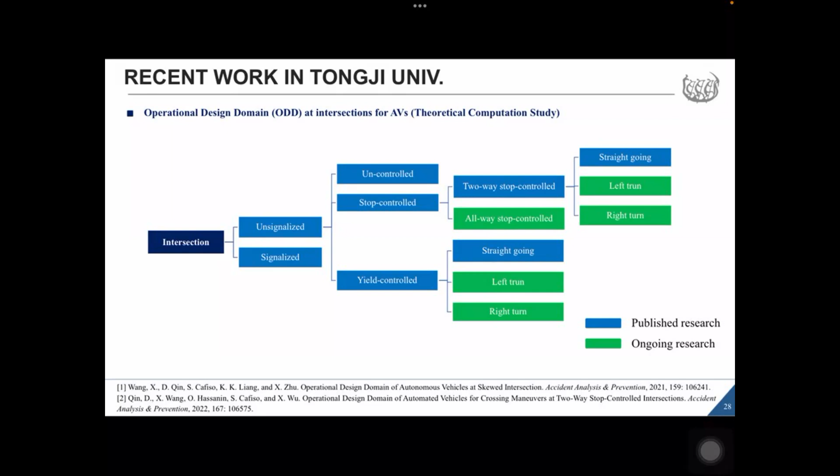Since last year, we have started to conduct highway readiness studies for AVs based on field tests. The Tongji University Road and Traffic Holographic Data Acquisition System was employed on the test vehicle, and we analyzed the impacts of highway design and condition characteristics on the performance of AVs.

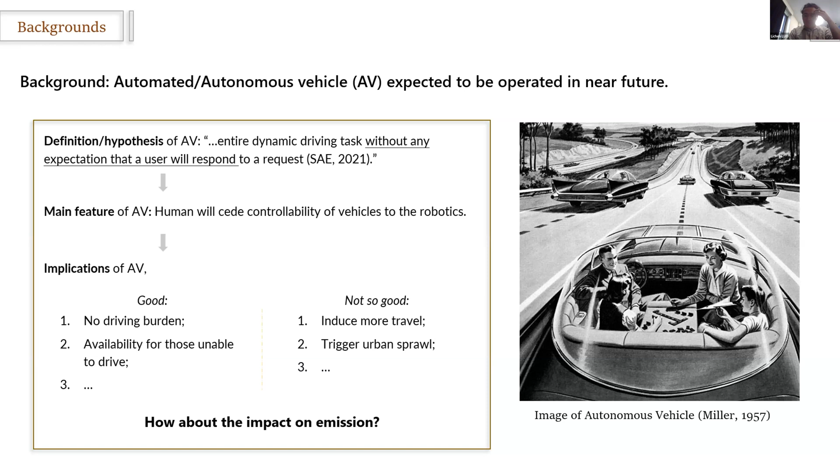On this slide, I'll give you a brief summary of the relationship between AVs and emission effects, as a brief literature review. In our exploration of greenhouse gas emissions, it's evident that the transportation sector plays an important role. Specifically, in 2019, this sector was the fourth largest contributor to global greenhouse gas emissions, with a substantial 70% stemming from road transport.

Considering the urgency of climate change, the coming 2 decades necessitate rapid decarbonization with a particular emphasis on the transportation sector. A promising solution in this domain is the integration of CASE, which represents connected, automated, shared, and electric vehicles. Research from Austin, Texas, indicates a projected potential benefit of around 40% reduction in CO2 emissions by 2050, closely linked to the transition towards renewable energy sources,

according to the authors. A crucial consideration in this discussion is the choice between private and shared mobility. Private automated vehicles, abbreviated hereafter as PAVs, offer benefits in urban accessibility and environmental impacts, but to a lesser extent than shared mobility. To illustrate, a study in Portugal demonstrated around 21% CO2 reduction with shared automated electric vehicles as opposed to the private ones. Yet, it's essential to consider societal inclinations.

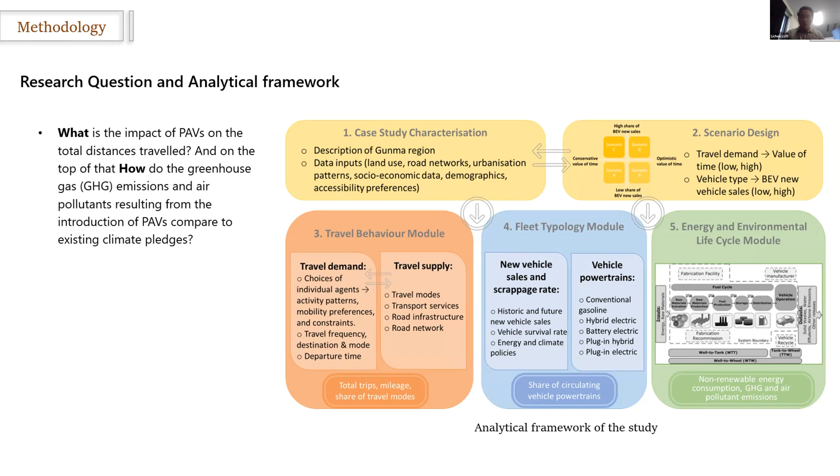And thirdly, we modeled the travel behavior of individuals in the case study area. This included analyzing data on the travel patterns, mode preferences, and other choices. And fourthly, we developed a typology projection until 2050 of the various types of vehicles, to identify the different powertrains and the fuel efficiency for the vehicles to be deployed in 2050. And finally, in the 5th stage, we evaluated the energy and local environmental impacts of the scenarios designed, considering the previous 3 modules, for the year 2050.

So to the best of our knowledge, there exist distinct research gaps within the domain. Here, I'd like to briefly talk about the originality of this research. Our study aims to address and narrow the research gap. First of all, studies conducted with PAV in an emission context are relatively limited, and especially induced travel demand resulting from PAV introduction has not been properly accounted for in emission calculations. For example, many in the existing literature use current travel demand levels, and some others rely on exogenous assumptions or calculations.

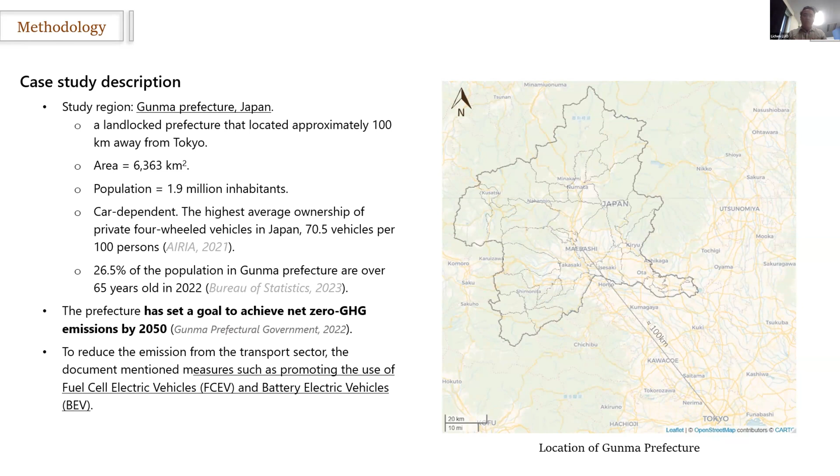And as a result of that, we then think about the various characteristics for the 4 alternative scenarios, accounting for different levels of value of travel time and the level of electrification in 2050. Scenario A presents conservative assumptions in terms of the 2 variables. The share of new electric vehicle sales from 2020 to 2050 follows a modest growth as announced by the current policy of the Japanese government. Accordingly, battery and plug-in electric vehicles represent around 25% of the total travel demand by 2050. Scenario B, on the other hand, considers a more optimistic set of values of travel time and the same share of new electric vehicle sales as scenario A.

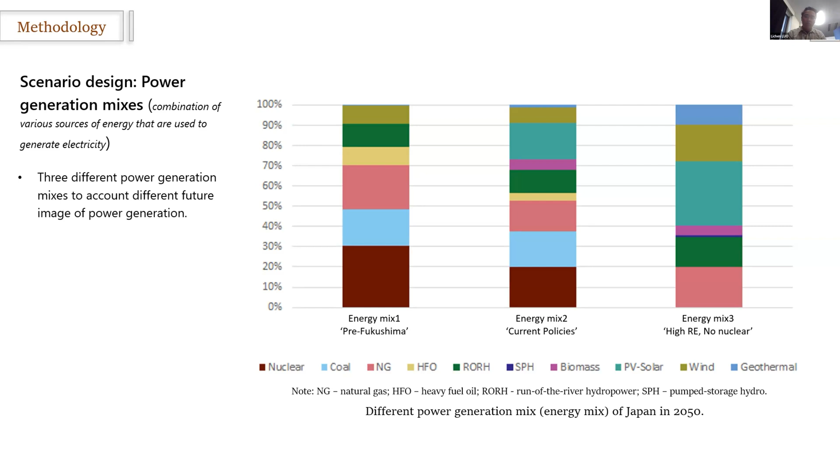And the second, a moderated combination of nuclear energy and renewables that aligns with the present state of affairs. And thirdly, an ambitious penetration of new renewables in the power grid reaching around 80% by 2050, and no nuclear power plants are online.

And as for the travel behavior modules, we basically follow one of the previous papers conducted by the authors in the previous year. So the model system considers 2 modules pertaining to the transport domain: an activity-based travel demand model DAS by Bowman and Ben-Akiva in 2001, and an agent-based dynamic traffic simulation model, MATSim,

which I think both are quite well known in the transportation field to evaluate the transport demand and supply parts. So the 2 modules were integrated to capture the short-term travel demand supply interactions, which we think is important in measuring indirect effects such as travel congestion due to the induced travel from the PAVs.

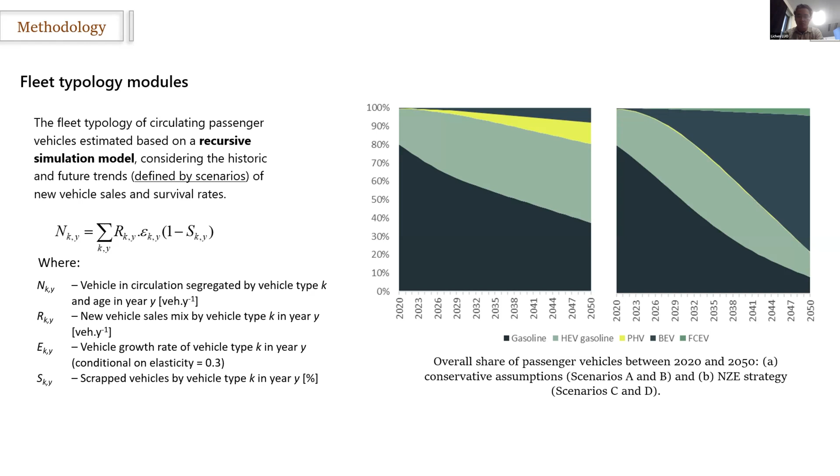And the life cycle assessment analysis used in this study also merits some information here. So the target for the LCA, life cycle assessment, in this study involves the consumption of fossil fuel resources, greenhouse gases, particulate matter under 2.5, and nitrogen oxides and sulfur oxides.

And the system boundary of the analysis encompasses both the fuel production, so-called well to tank, and the driving of the vehicles, commonly referred to as tank to wheel, and also the manufacturing of vehicles is included in the analysis, while the end of life, like the reuse of batteries in electric powertrains, is beyond the scope of this study. So basically, we use the GREET model to do the LCA assessment for this study.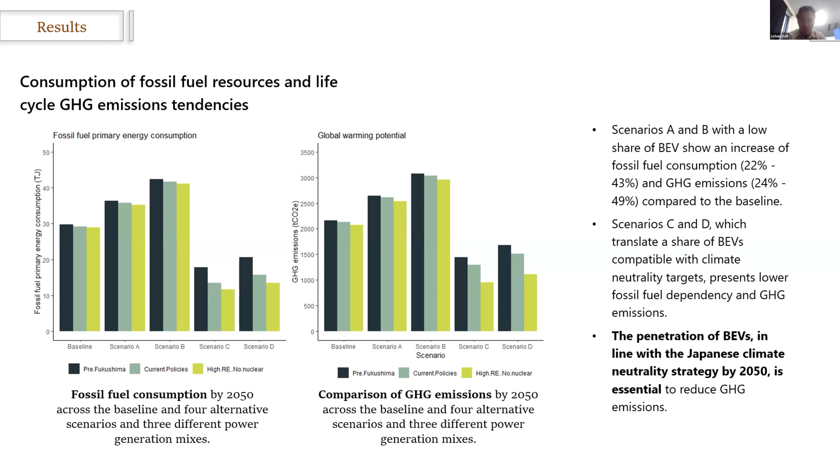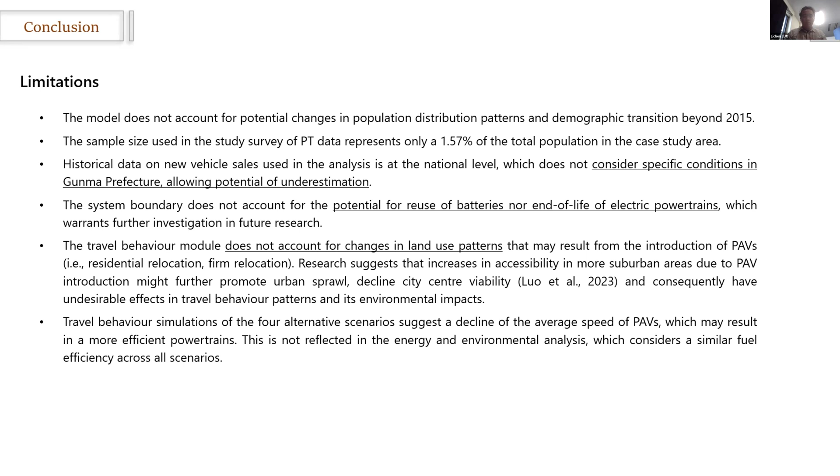Also, the travel behavior simulation of the four alternative scenarios suggests a decline in the average speed of PAVs, which may result in more efficient powertrains, but that is not reflected in the current methodology we used.

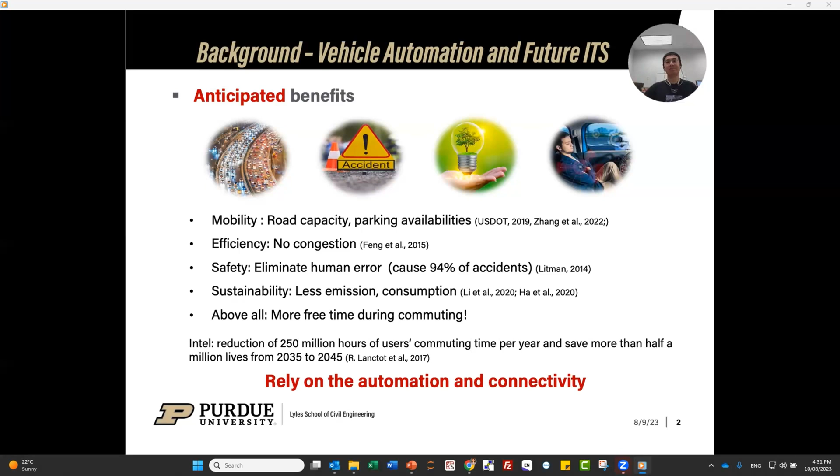Despite these anticipated benefits, we are still far from there. To begin with, do you really trust AVs? Are they actually as safe as they sound? They claim they can achieve Vision Zero, but how do I know?

Do you really trust AVs? There's a survey done by NHTSA, the US government, which said Tesla's autopilot function can actually reduce crash rates by 40%. So indeed, it's helping us—autonomous driving function is really good.

And still, the Advocates for Highway and Auto Safety did another survey in 2018, the same year, saying 75% of people are not comfortable with disconnecting the vehicle equipment. That means 75% of people don't really want an autonomous vehicle—at least one without steering wheels, pedals, brakes, completely controlled by the autonomous agent; humans aren't able to accept that. Also, 64% of people show severe concerns about sharing the road with AVs—they don't even want to drive on the same road as autonomous vehicles.

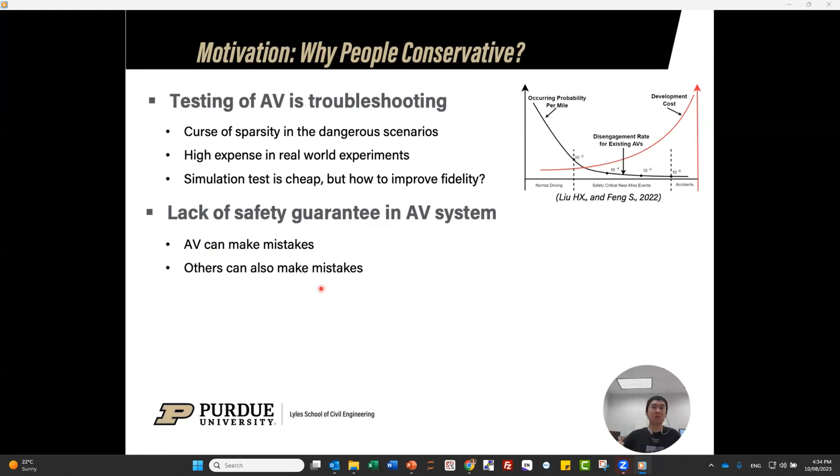The second thing is that the majority of efforts people pour into autonomous vehicles is to prevent the AV from making mistakes. But what if other people make mistakes? You're driving on a road, someone is drunk maybe and driving aggressively, and he can crash into you very easily. So how do AVs respond to errors made by others? When surrounding people are at fault, what can we do? From this perspective, we don't have a safety guarantee for the majority of existing autonomous vehicles.

The third thing is that the majority of AV systems are driven by AI, artificial intelligence. For things like perception and camera processing, they require a heavy dose of deep learning, or sometimes reinforcement learning for decisions. So these AI systems are generally considered black boxes. We don't really know how the AI makes decisions, so the rationale behind that is unknown. Even worse, when the AI will fail is not predictable - we don't know when it will lose control and cause a crash. We have no idea, and we don't generally know how to improve such black box behaviors. You have a model and have no idea how to make it better.

So with these three severe problems, we understand that with these not solved, people are always conservative.

Generally, what we are trying to tackle with these three challenges in this specific project is: for testing and troubleshooting, we're trying to build challenging testing scenarios for autonomous vehicles to travel through. Also, we still use simulation tests, and we want to improve the fidelity of the simulation to guarantee AVs can run safely. We also build an emergency response AV system - actually a proactive system for when others are making mistakes, what can we do? So we look into this scenario when others make mistakes. And third, to tackle the black box behavior, we want to make AI models more explainable. That's why we use a methodology combining machine learning, the data-driven approach, with traditional control.

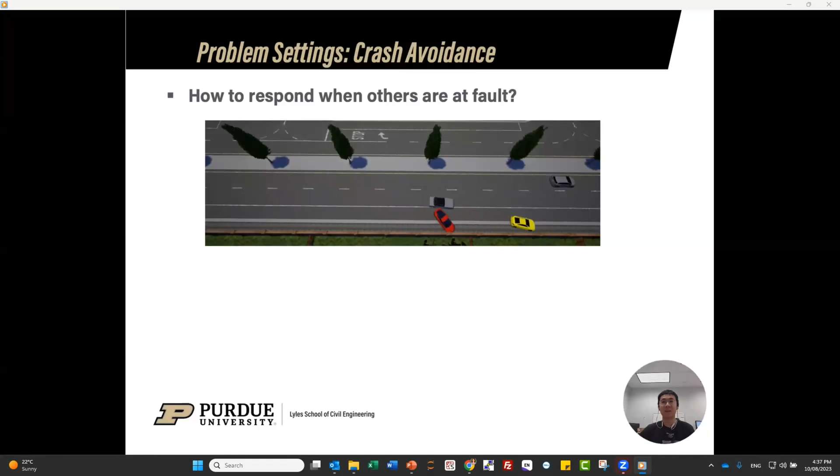With this being said, let's look at the problem settings - what kind of situations we want to solve here. We are driving the red vehicle, and there are some drunk drivers, for example this yellow vehicle. He is driving aggressively and makes a lane change to crash into us. We want to avoid this kind of situation when others are at fault. There are challenges behind that.

Of course the computation needs to be really fast. We are dealing with a highly dynamic surrounding environment - the number of vehicles surrounding us is always changing, the types of vehicles are also changing, the type of corridor shape is also changing. So we want to avoid collision with the at-fault vehicle, but at the same time not create new collisions with other vehicles - we have safety requirements. That's why we're trying to solve this by combining traditional control with machine learning, to make the entire system more reliable and safe.

For the general methodologies, I'll give some background on why we are choosing this learning plus control framework. There are purely learning-based methods - the pros are they have very high representation power, they can do fixed time inference, and it's very scalable. For example, with neural networks you just fill in the input and it generates the output, no matter how complicated your input is. But the cons are also obvious: black box behavior, requiring massive data for training, and generally lacking safety and convergence guarantees, which is very bad. For traditional optimization-based control or planning approaches, their pros are very high interpretability.

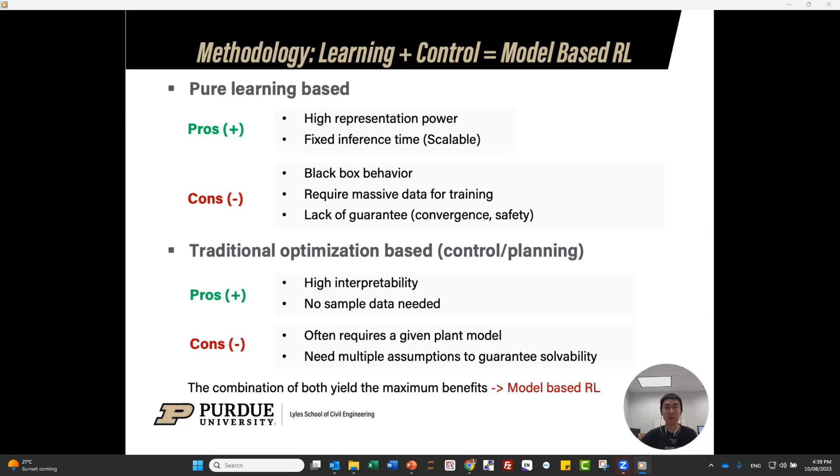But the cons are generally they also require a given plant model, which is like the state transition model. This is very hard to derive, especially in highly dynamic and complex situations. And it needs multiple assumptions to guarantee solvability, because the problems can easily turn non-convex. So by combining these two approaches, the learning-based and the traditional optimization-based, we can have the model-based reinforcement learning, and this can yield the maximum benefits.

So what is model-based reinforcement learning? In another word, you can call it neural MPC as an example, which is the model we are using here. It has several components. First, it has a model, which predicts the situation of the system. For example, here we are predicting the future trajectories of all the surrounding vehicles, including the at-fault vehicle and also my ego vehicle.

And with this model, we can do planning based on that. Here, the planning is an optimization-based method. Combining these two, we have the model predictive control, and by executing the control command, we can consistently acquire new data and new experience. Then we use this data to improve our model, so it becomes a loop, and the model is continuously becoming better and better.

So for the model, what we are trying to do is give the historical state of the vehicles and then predict the future states. For example, you give the historical trajectories, the XY locations, speed, acceleration, and you predict where the vehicle will be. Then you use this model to determine how close my ego vehicle is to that vehicle.

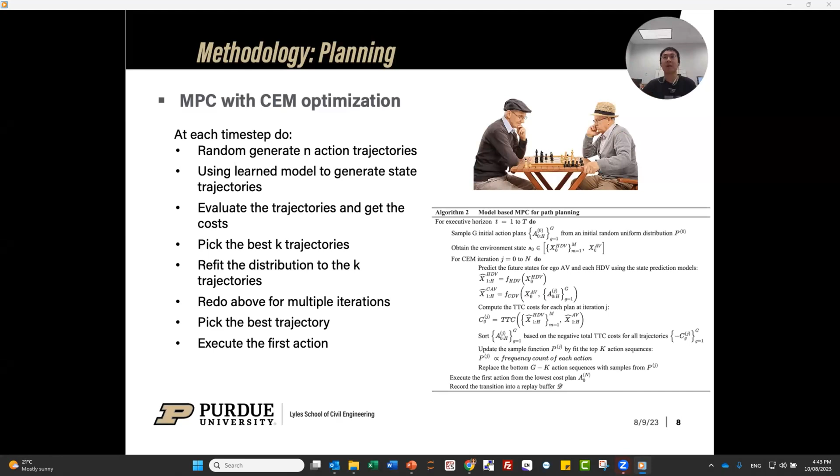So here is the full algorithm. I will skip this part because the time is too limited.

So for the experiment setting, what we have here is the state space and action space, and of course the cost function. For the state space, we are considering the human-driven vehicles, the HDVs, and also the ego vehicles, which we call the CAVs, the connected autonomous vehicles.

So we have the location, speed, and acceleration for each vehicle. But for the CAV specifically, we also have the control command: the gas position, the steer, the brake for the past few time steps. With that, we can predict the future state. So what are the actions we need?

So here we are only considering discretized actions. We discretize the steering angles to -1, 0, and 1, which is like left increment by, for example, 5 degrees, keep, or right increase by 5 degrees at each time step. So it's a discrete action. For the throttle and brake, we also combine them into discrete actions. So -1 is brake, 0 is keep, and +1 is throttle. This is mainly to reduce the sampling space for my cross entropy optimization.

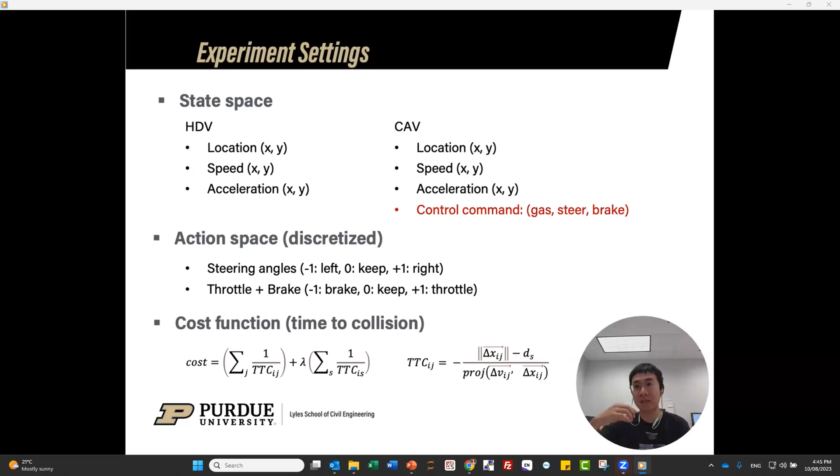For the cost function, we are trying to use the time to collision for the ego vehicle to the rest of all the surrounding objects, including the dynamic objects and the static objects. So we pick the best action trajectories with this minimum total time to collision.

Okay, then I will introduce the dataset we're going to use for developing and testing our model. We are using the synthetic dataset, which is collected from the CARLA simulator. We are developing very conservative scenarios in CARLA. For example, this yellow vehicle, they are very close at the very beginning, but the yellow vehicle will make a huge right turn right in front of the red vehicle. So we are assuming a very big constant steering angle. And this is only used for developing our model.

For the testing, we are using real driving simulators. We ask our participants to drive as aggressively as they can. We also create dangerous situations for them so they can avoid the collision by driving aggressively. Yeah, so we are trying to induce them to drive aggressively. This can be used to test whether our model is perfectly designed or not.

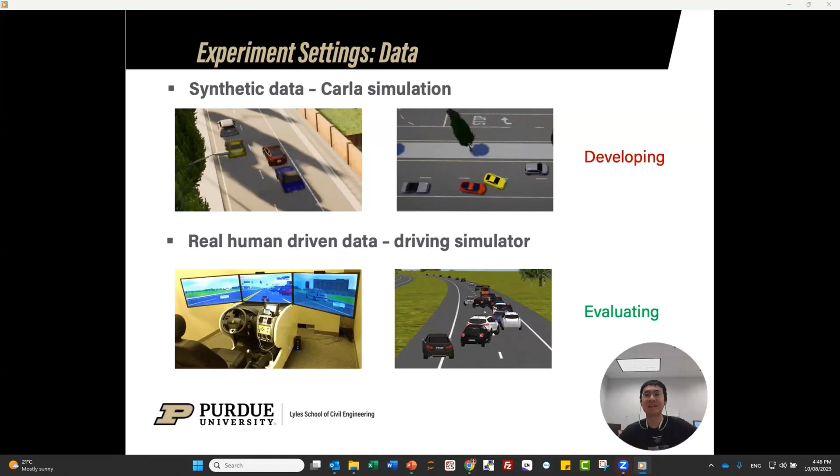Okay, we are trying to demonstrate the performance of our model by showing the collision avoidance success rate, and also the computation time for the model depending on different model parameters. We have different planning horizons, numbers of random trajectories sampled, and numbers of cross entropy method iterations, and that determines the best performance of the model.

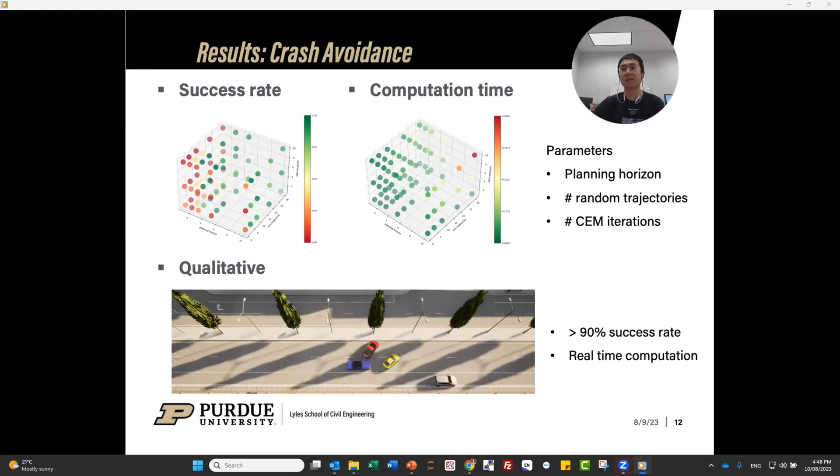As you can see here, those green dots indicate our model can actually avoid more than 90% of the crashes. And you can see here for the qualitative evaluation, the yellow vehicle tries to crash into the red vehicle, despite them being very close at the very beginning, but still the red vehicle can act accordingly within a very limited time. So that indicates our model is doing it perfectly.

As I mentioned before, we also evaluate our model on real human driver trajectories that we collected in the driving simulator. We collected a lot of left and right lane changes, and we define the aggressiveness using the average lateral speed, so how much you travel in the lateral direction in the given time. We can see some of the trajectories are very conservative, for example, this green one. Some of them are very aggressive, for example, the red ones. Right.

So the key idea here is that we can still achieve a pretty decent or even higher collision avoidance rate, more than 95%. So that generally indicates that our efforts of building the model in the conservative simulation scenarios and testing in the real scenarios can actually work. Right. So that gives us the confidence that we can actually test the autonomous vehicles by placing them in the more conservative, dangerous situations, so that in the real world they can still perform well.

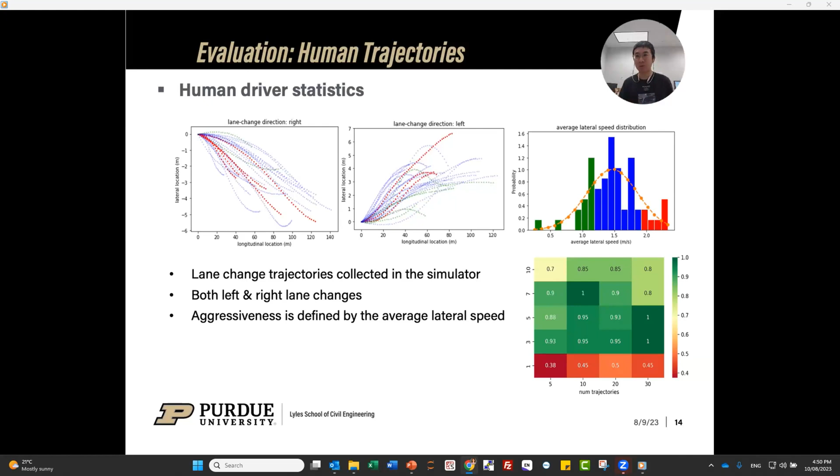So for a little bit of conclusion here, we built a very simple algorithm, basically the model plus the planning, and we achieve awesome performance. By awesome, I mean it has a high success rate for crash avoidance, even in a very highly dangerous situation. And you can achieve faster computation. This only runs on one GPU, and it even includes the simulator rendering and everything. So the computation is very small.

For future work, we can consider multi-agent control. So for example, the autonomous vehicle can not only control itself, but also control the surrounding vehicles to create a gap for it to avoid the collision. And we can test the system with some more dangerous scenarios, for example, some rear-end cases, or even front-end, very dangerous cases. Yeah, that's the future plan.

Okay, this concludes my presentation, and I thank you for all your attention. Again, I have to apologize, I cannot present in person because we will have an autonomous racing event tomorrow. So here you can see our autonomous racing car. It's a full-sized car, but no man inside. Yeah, it's pretty cool, right? And tomorrow will be the racing day.